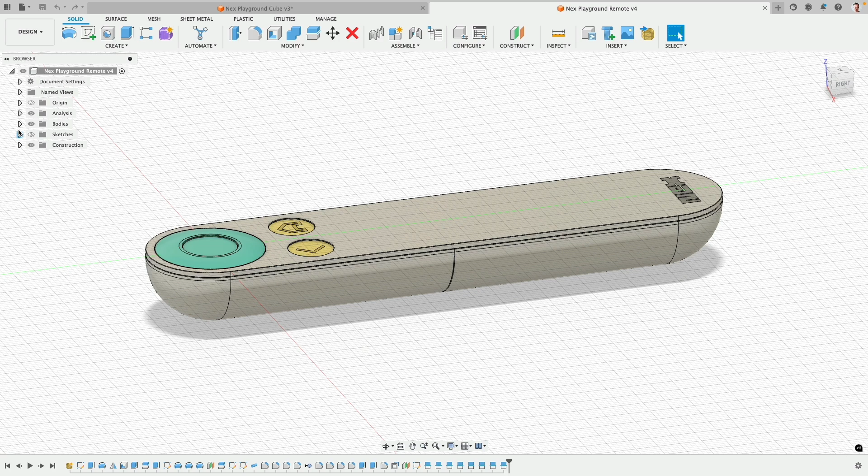I will run you through the whole process of bringing in a scan model as references, how to set up all the necessary sketches, and then building the individual designs. Also, as you can see, everything got materials, and I will show you how we can share the materials between different Fusion 360 files.

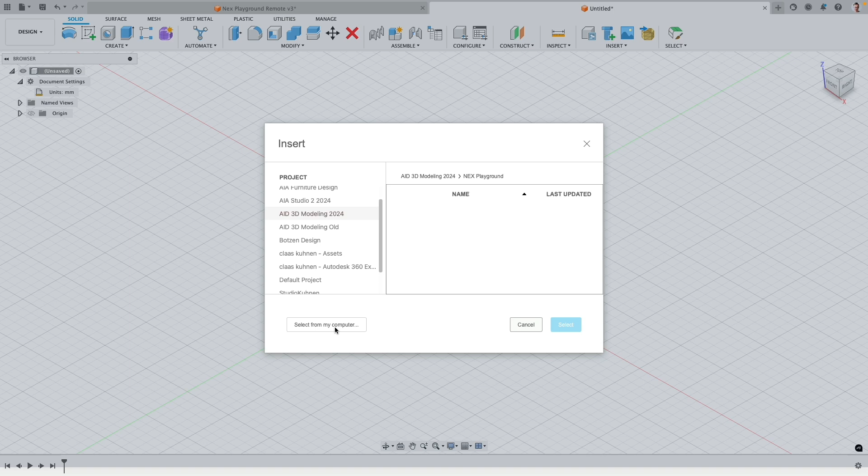Click on plus icon, right click, make sure the history is on. We want to have the unit system set to millimeters. Then we can go insert mesh, select from computer, navigate to where you have downloaded and unzipped the reference file, and here's the NEX Playground control.obj mesh.

Click open. This design was adjusted and then exported from Blender, which works in meters. So you want to work with meter as the unit system, otherwise it's too big or too small. Click OK. There we are.

Now I said no, we're going to create a more simplified version. It's a little bit faster, also less complex, more appropriate for this task what we're doing here, loading Fusion a little bit. Our first step to do is learning the building blocks.

So we can see there are some buttons, they're all circular, and then the main body looks like a rectangle with left and right rounded corners. Kind of like rounded corners, and two lines.

If we go to the side view, we see this is actually a little bit straight down, and then that maybe looks like an arc, but it's not really an arc. And if we go to the front view, we see this again goes down, and then this is nearly tapered, slightly curved, and then it curves more, so it looks more like an egg or something, not really a circle or ellipse.

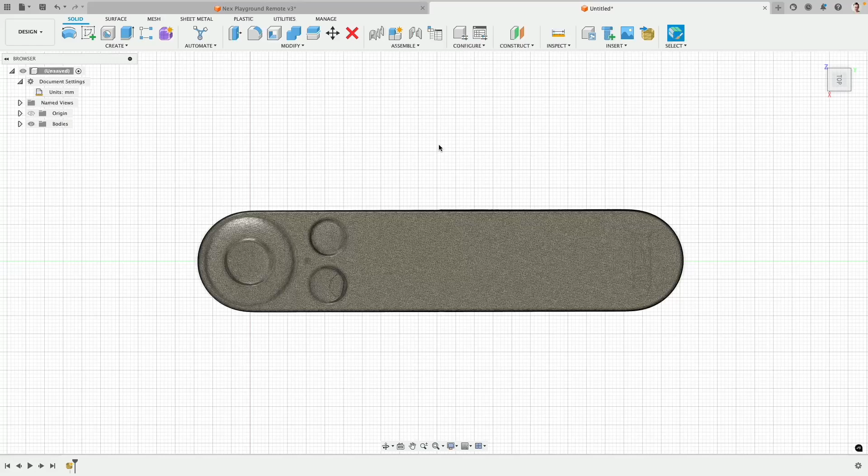We will create a sketch, and on the ground we can start with a circle from the center of the origin. I make somewhere another circle, then I will draw a line from circle to circle. I will also draw a line from circle center point to circle center point, then from the center point draw a line to the side, and then you can horizontally align these lines.

This one already has it there, so I don't need to add it. Go to tangent constraints and make sure the lines are tangent to the arcs. Very good. Equal constraint there. Press D. The first circle is 28 because they have an equal constraint. The other one is the same.

And then we can, while still having the dimension tool turned on after we press D, specify the width 130. Cool. Okay, so that's all what we need to start with.

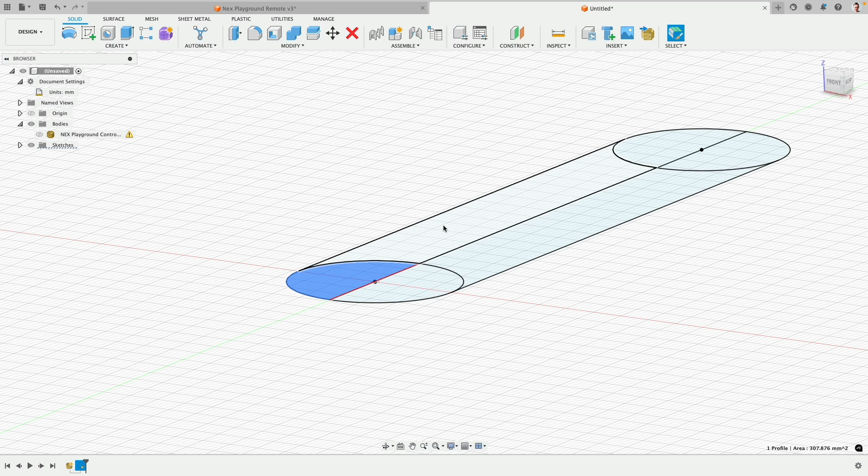I hide the scan, and then these three sketch faces I will select and extrude down -2 millimeters. That's all I need at the beginning.

And then I can select this lower profile, which, as you can see, is now kind of like what we nearly created with the sketch. Go to the revolve command, select this lower center line, and then I revolve this one down, for example, 180, and turn off create new body. Turn off join and select create new body, because I want that to be separate.

You can hide this. Here we have only half of the piece, so we can select the mirror command and mirror this over. This time here we want join to be turned on, flop. And then you should see two bodies. Pretty cool.

We can at this point also think about the shell, for example. Let's say 1.25 millimeters for the shell. So this lower part, which will house the batteries, for example, we shell out that way.

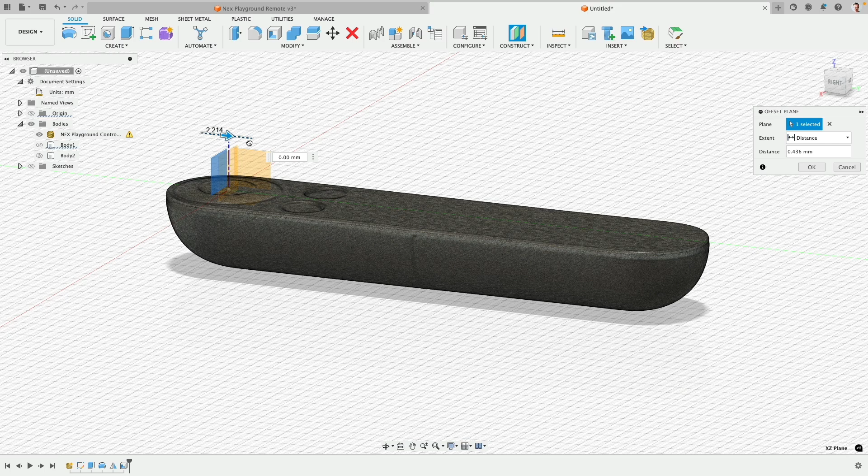Here's now the lid. And if I turn everything off, besides the scan, we can see there is actually a split line. So let's create a construction plane. Click on that Z and X plane, and we bring this over 51 millimeters.

That's going to be very useful because we can call in solid mode the split body command. The lower body we will split by that plane. There, we call then the move command. You see this got separated. It's a very simplistic way how to model this, but it works.

Okay, beautiful. Now, as you see, not too complicated. Und that was German, by the way.

So then what we can do is think about the interface elements. I hide all these bodies. Right click, make a new group. I find this very often is easier turning off the group than always turning off these bodies.

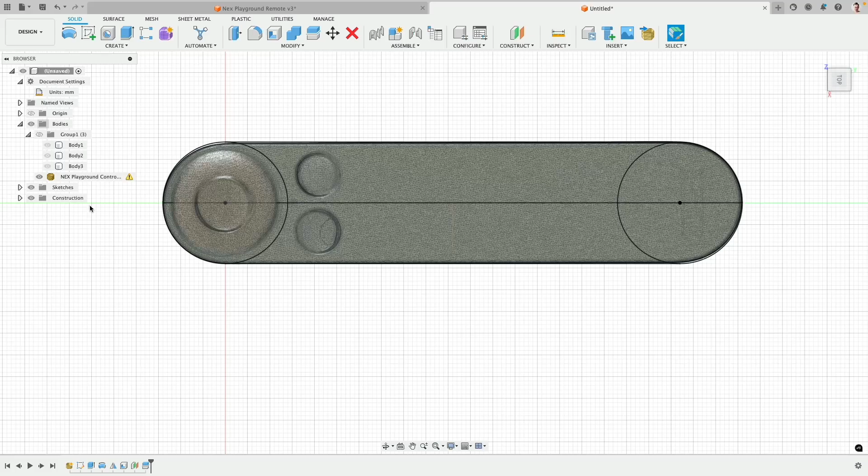There we are. And I will go to top view, right click, edit sketch, bring in one circle, another circle. These two circles are equally constrained. They have a symmetry to the center line. So when I press escape now, you see they move perfectly the same.

We give them a dimension of 10 millimeters. Escape, and yeah, that looks good. Can drag these around a little bit.

Let's say 6 millimeters. That's maybe a tick too close. Let's say 6.5. Yeah, cool. Okay.

Then one circle here. So we make that one 12, and one more circle 24 millimeters, and press enter. And these dimensions I can then also drag out.

The mesh can sometimes be a little bit in your way when you start trying to select elements, which is why I just turned this one off.

Okay, beautiful. We can click finish, and what we can do now is we select all these fragments, go to extrude, and then we just cut through. So we cut the holes in there, you see.

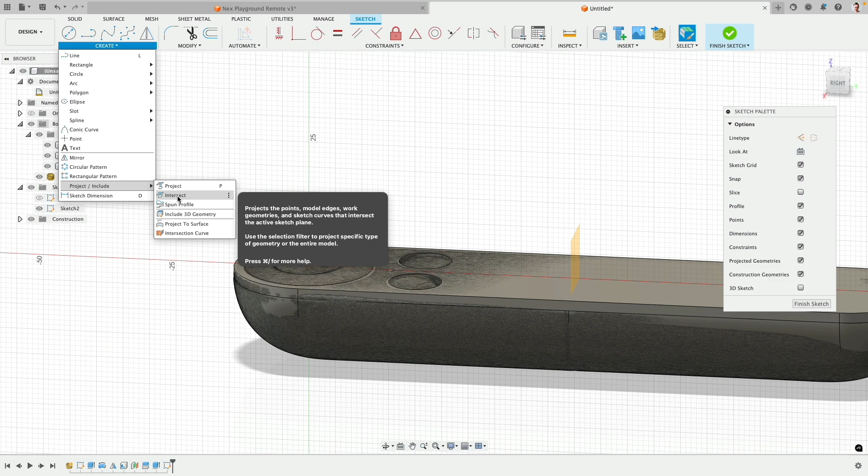Then create, go to project include, and I will select this intersect command. Click on that ring and click OK. And then I have left and right snapping points.

Perfect. So that's going to be very useful because what I can do now is I will draw myself here a line, connecting these 2 points. This also overlaps here with the y-axis.

There's more coincidence. I draw a line straight up. And if I show this one, the buttons is a little bit rotated.

I was playing one time and unfortunately the remote control flew out of my hand. Well, you should always hold it while playing, and smacked against the wall.

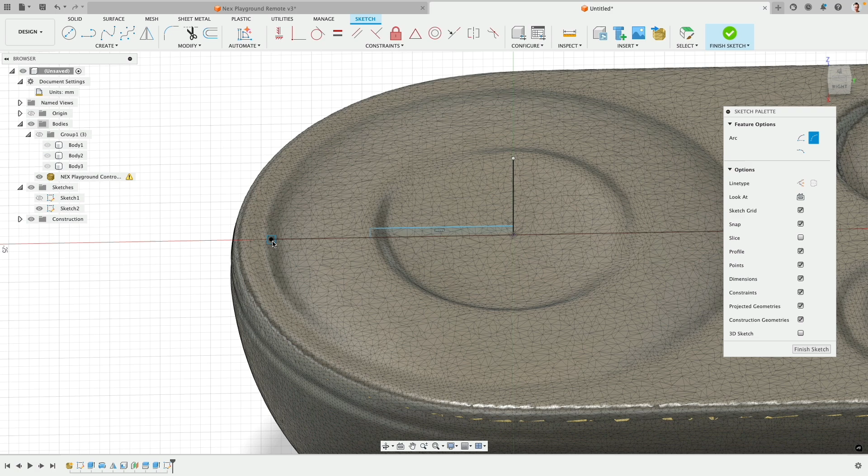Then we draw a line to the left side, say be horizontal. I can draw a line straight down, and then I will use the arc command. Start from the left, go to the right, and it's not so easy to see, but you see once the arc is tangent to the line to the right side, I get the tangent command.

This one. If you don't see it, you can also simply draw it this way and then say tangent, this one to there. Perfect. This line is horizontal. Very good.

And I will create another arc there to there. Okay. I will draw here a line. This line is perpendicular to this line.

If I delete that constraint, I can also make this horizontal. And then I say arc to this line, please be tangent. Very good. So it's a little bit difficult to see where everything is.

We can go to the side view, press escape, and then this, I think we'll go to somewhere here. This can go down a little bit. We have to be careful with what we are dragging here. So there, this definitely feels like it goes to there.

Does this line up? Oh, that's close. So we can select, oh, look, there's a line fragment. Sometimes that happens. So delete this one, bring this back on that line.

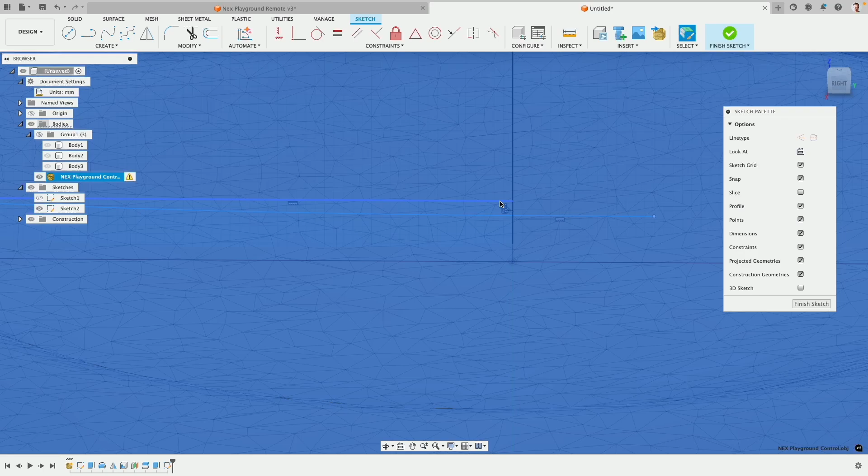And then I think, yep, that is horizontally constrained already. We select this line, press D, 7 millimeters. That is good. What is the height here? 0.7. Beautiful. The rest is predefined.

And because this is a button, it has to go down a little bit. So I'm drawing also here the rest of the missing sketch.

Then I can hide this and check out this. With Shift left mouse button, I select those two sketch profiles. Go to revolve. Now this line was selected. Or I can go to revolve, select these two profiles, axis, and select that. Now join. Beautiful.

So that is kind of like how I then created these two buttons. They press down and this presses down a little bit. They wiggle to a degree. And they perfectly also fit in, which is the nice thing. We have very sharp edges. That is totally fine, we will deal with that later.

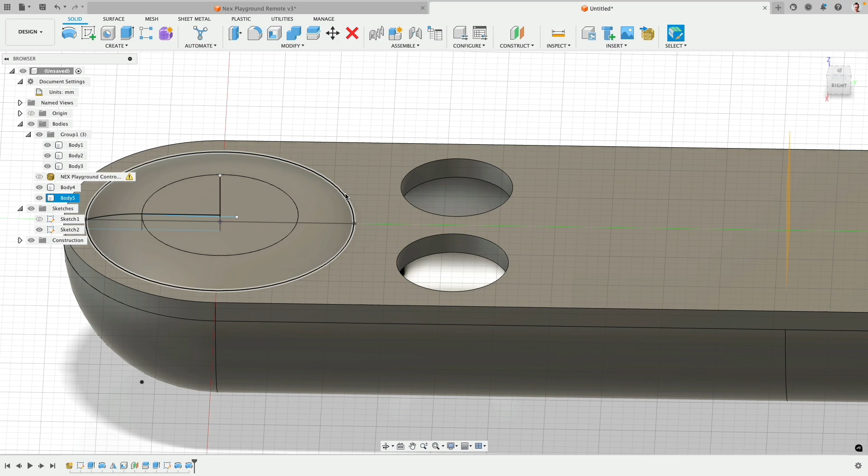So we have these two buttons. How can you make, for example, left and right button easy to differentiate? Well, one button could be concave and one button could be convex. What would be maybe an easy way to do this?

We need two sketches for the revolve command. But how do we position them? They're perfectly in there. Can we create an axis through 2 points? Yeah, so there to there. There's an axis. Beautiful.

And then we can create a plane at an angle, select that axis to create a construction plane that runs perpendicular through it. Then when I turn all this off and create a new sketch on this construction plane, you guessed it, I will do exactly the same thing again.

Bring this one in, bring this one in. This I can hide, and I will draw myself here one line, escape, and then one line there, and escape.

Midpoint down, let's say 2 millimeters, and L is the line command. There's the midpoint there, 2 millimeters down. They have to be black, otherwise these lines could be rotated, which means...

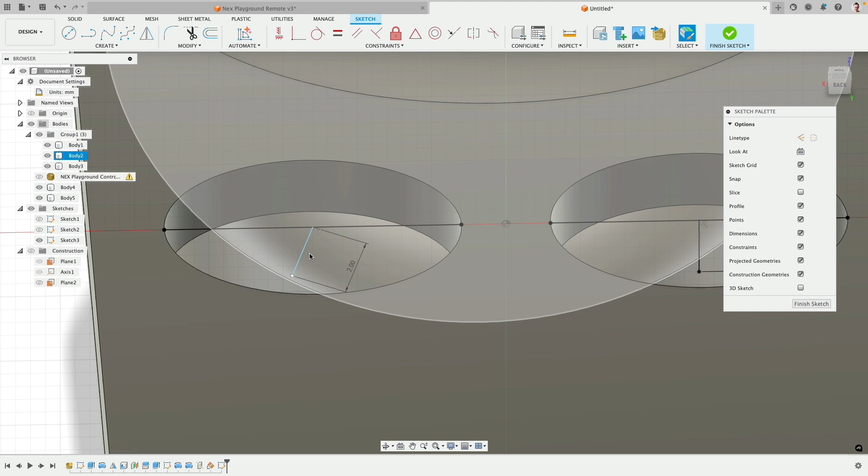Left mouse button click. I can't actually select... there, that's the perpendicular constraint. If I delete it, you see how this can rotate. Then just make this horizontally constrained. At this point, we can drag these two into that group, hide that group.

So it's much easier now to work with. The left we will make concave, and the right we make convex. Easy peasy. So I will continue the sketches here, just blocking out my rectangles. We said this one we make convex, and the other one we will make concave.

Actually, I dragged this one over. Oh look, this can be rotated. Now we horizontally constrained it. These are just only helper lines.

So there is the arc. So if it will be concave, the arc has to start on the outside. And here the arc, the bottom has to go down and ends at the center. And there it is. Tangent to this line. Perfect, finish sketch.

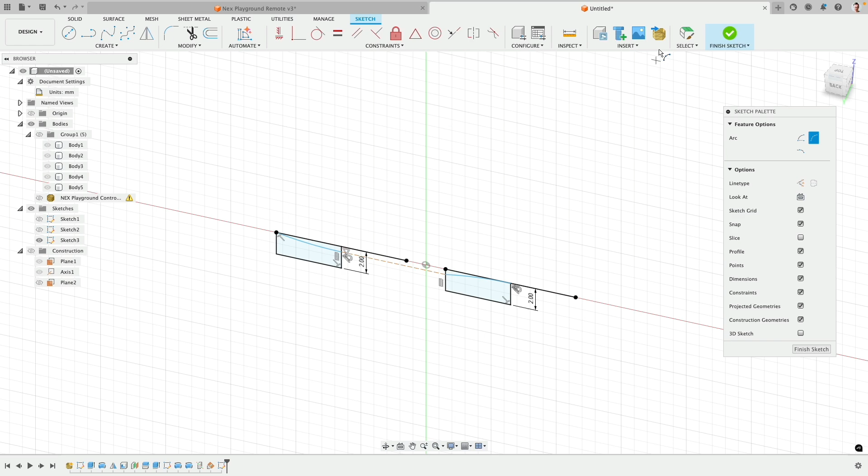Then we go to revolve and say you rotate around this one, right click, repeat, around this axis. Oh, look at that. Concave, convex. Easy peasy. Beautiful, very nice.

We do have actually at this point a lot of our details done. Filleting, etc. might come at one point. But before we do this, there's one last thing to do. You see here we have kind of like a cut.

I messed up actually the scan. That should be on the right side. All good. How can we create this groove that runs over that surface?

It's pretty easy. I want to create a sketch, seen from here. Then I will draw a line up and a line down. I will make both lines equal, press D, and then say this is maybe 9 millimeters.

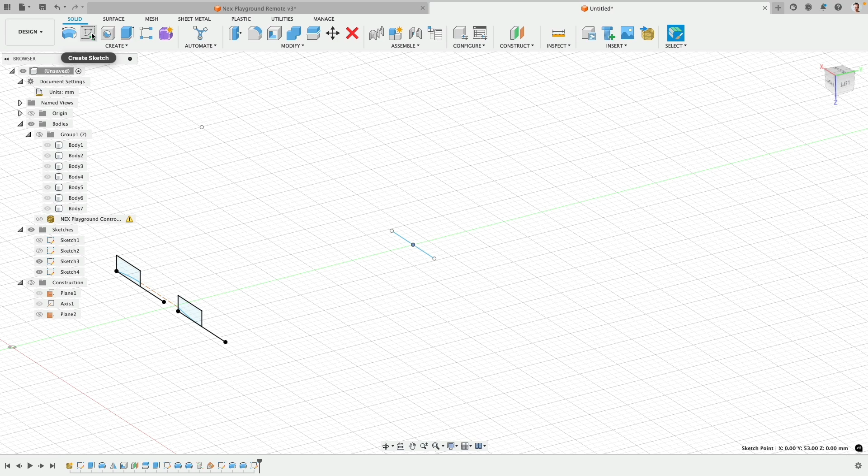Do I have actually a selection turned on, or select through? Okay good, and I also have the paint selection here, so brush, not window selection. Anyway, that's actually all I needed for the sketch. And now what I would like to do is I would like that sketch to project onto there.

To do that, I need to create actually a new sketch. So create a sketch, it doesn't really matter what we click onto. Actually hold on, because you didn't really see this. Right click, delete, make a new sketch. I will just select this plane, and then I will call the project to surface.

So on that surface I would like this and this to be projected along vector. Select the direction, that is the Z direction, and then you should see the red line.

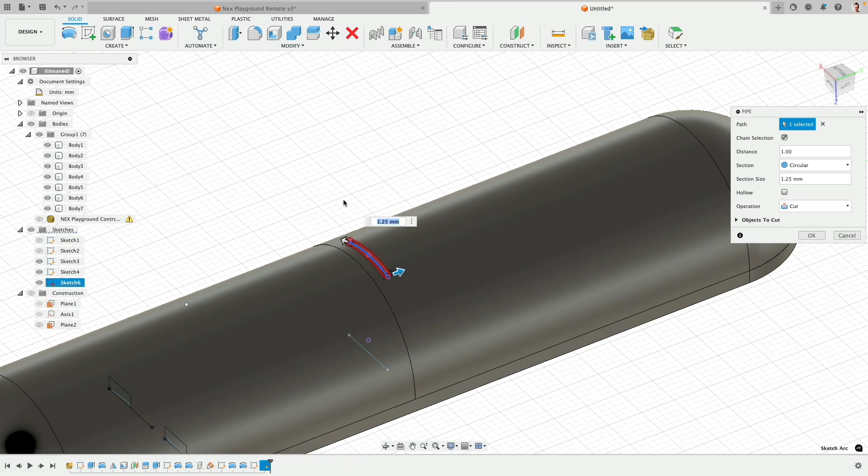Beautiful. So what we can do now is finish sketch, go to pipe, select with shift and left mouse button these two segments, section size, let's go with 1 millimeter so we don't make this too thin. Click OK. Perfect. We have to be careful that we're not cutting through.

If I go to a side view and say section analysis and click actually on this plane, click flip, and there we can see how we are cutting into the space. Well, the section actually is fine. All good, and then we can turn this off.

Sketches we can also hide. And this is now a point where we can start detailing everything.

I will start here, play with the fillets. So this has to be actually half of this edge. Is that 0.5? 0.5 millimeters. What's the radius? Oh, radius is 0.5. Right click on the pipe feature. Yeah, 1 millimeter is a diameter, so the radius is half a millimeter. So this is correct. And then we do another fillet, 0.25 for example, to fan this out a little bit, or 0.5.

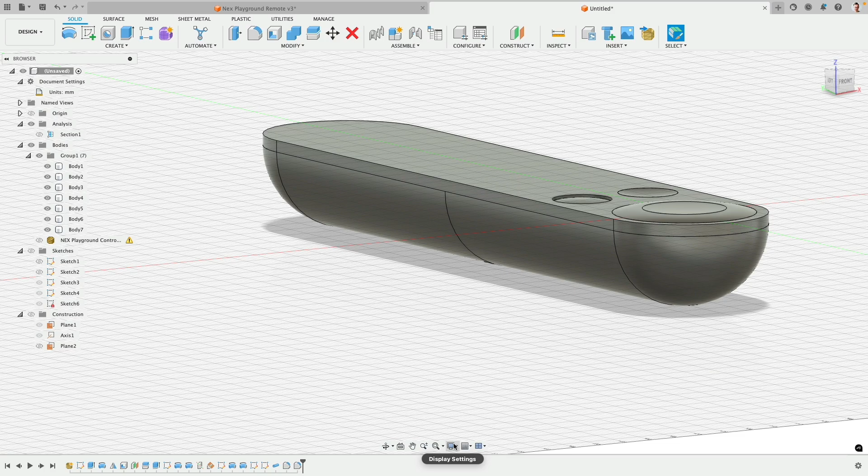Yeah, this is very easy to feel. We see all these edges. And if I go to shaded visual style, they are totally gone. To highlight them, what we can do is we're going to break these edges a little bit.

I will hide this button, this button, this button, and this button, and then I will go to fillet, and then I will say so you, you, and you, and this is the complete one for the top part. So I think there should be around, yeah, 17 edges, and then a very small amount, maybe 0.1, not too much.

Sure, you have done everything correctly. Yeah, all these edges should be rounded. No, actually, we needed to have 18 edges. Okay.

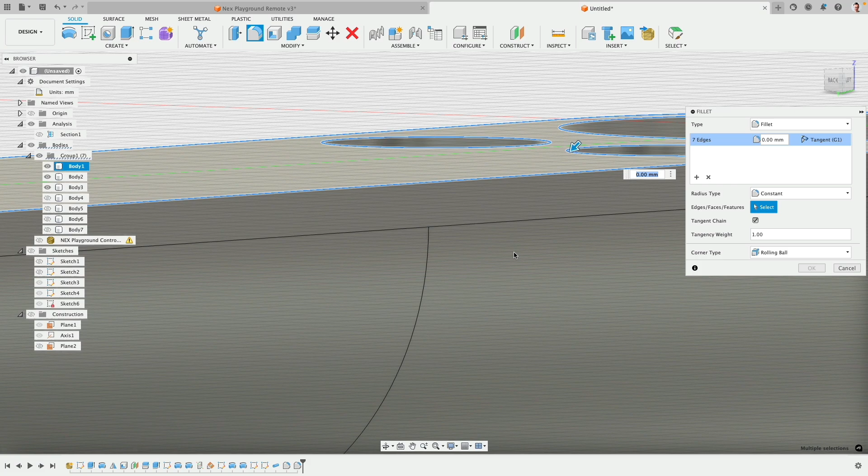There, but only on the outside. 0.1. Here was one ignored. So on a Mac, I'm holding the command key and I brush over here one more time. Click there. There's like, it's skipping actually some of those.

Okay, let's do this. So I simply said okay. This one we can hide. Then I go back and say add feature. Oh, actually it shows that again. This is sometimes a little bit annoying. Body faces.

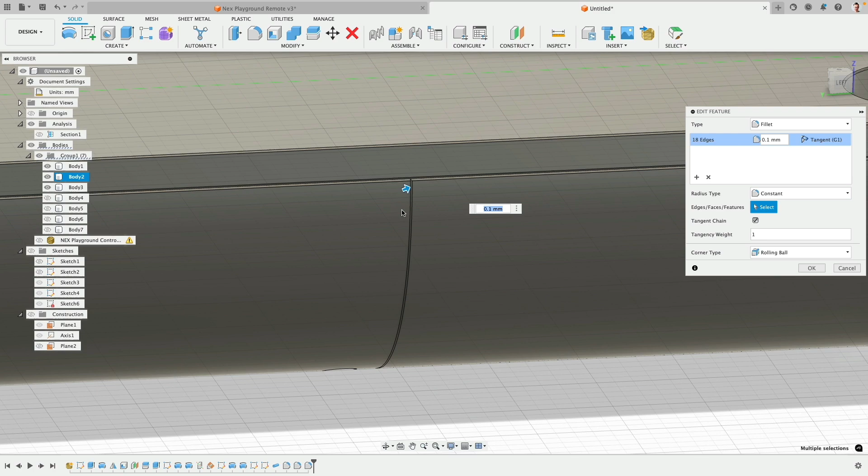So if, for example, like in your case, this doesn't work out, what else can we do? Actually, it's not really complicated. For example, I will simply do this. I say this one, this one, this one, this one, and this one. This is 0.1. Thank you. Then I hit the plus.

Hide this one, show that. Then I should be able to select those. 0.1. Okay. Yep, that is fine. Hide this one, show that one. Go plus, and then I click on these edges and say 0.1. So I will have one fillet command only, but I will have 3 different sets of edges. Click OK, very good. And there.

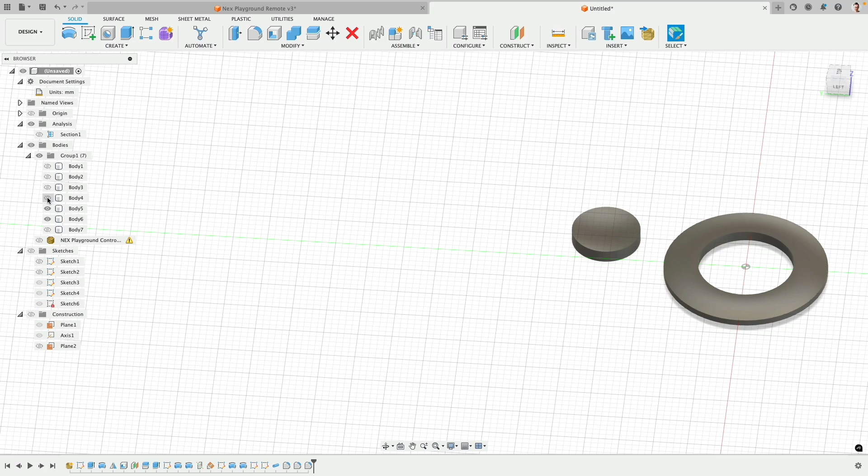Cool. Okay. Then we can turn that stuff off. We can show, for example, the buttons. Go to fillet, select this one and this one, 0.2 or 0.1, 0.2 maybe. And here, essentially, we do exactly the same thing. Right click.

I hold the command key, click this one, click this one, click this one. Can I get all 4? Yeah, I was able to get all at the same time. Beautiful. So all these edges I was able to click on this time without any big issue. Click OK. There we are. So all these are actually nicely filleted. There.

And this is maybe a moment then when we can think about the materials. So we can press A. Then we go to our library. Based on what type of finish you have, is it a matte finish or a glossy finish? Is it plastic or something? Nope, just simply pick what you need. We have here plastic as a material if you want to work with it, but I find this render is sometimes a little bit slower. And here in Paint, there's, for example, the glossy material.

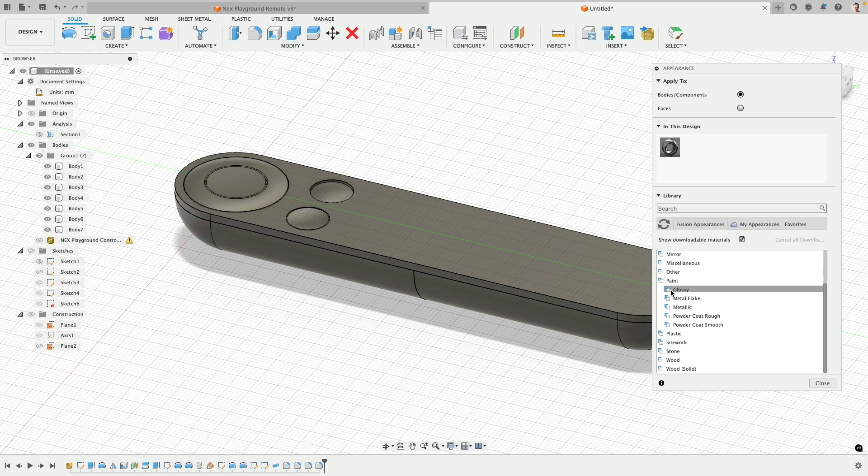So this is a little bit of a whitish material. So I can just drag it in, drag this one onto all these parts which are colorized, double click, and then I can find, for example, a nice whitish color. I know this one is 220 for both.

There, click done. Oh, double click, also give this a logical name. Test material. So why test material?

Because now you could right click and say copy to my appearances. You notice when you go to my appearances, there are all the other materials. There's, for example, my NEX Playground white, which I will drag in and drag over this one. So this is consumed. These buttons are yellowish. We'll drag this one in. So button, and these have that green color. Let me right click so you can see the green is 97, 206,

197, and this one is 245, 231, 138. So if you then make a new design and go to my appearances, you will have then the same materials. This way you don't have to remix them constantly.

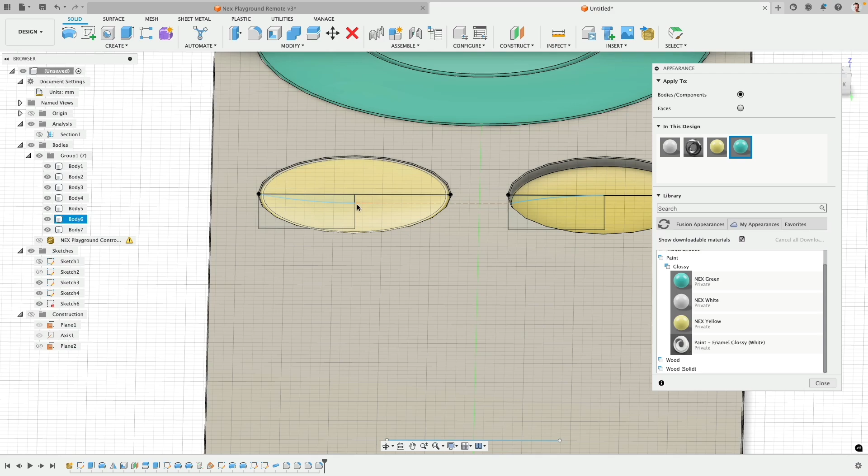Beautiful. Okay. So this is all actually pretty good. I want to do one little double check here.

Oh, I have to close this one. There, show this one. And this sketch, right click, edit.

Yeah, so this is indeed tangent. Is this horizontal? Yeah, it was horizontal. The reason why I wanted to verify this, I see a little kink there. You can see it right there. There's looks like a little pointy thing. This is often a giveaway that the arcs are not tangent to the other side, but this is okay. This is correct.

Now, to finish this, we have to create the button textures, so the symbols, and then we bring in the logo. The logo is also in the file. I googled the NEX logo, and then I was looking for an SVG file. This is something that's very common if you also work with other brands. They have their logos. You don't want to create the logos.

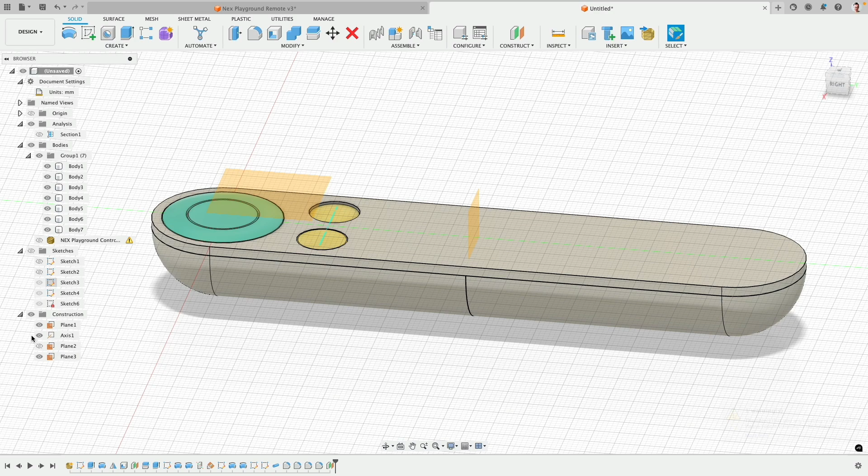So I will create a new plane. I will bring this plane a little bit higher so it's easier to see where I am. On this plane, I will create a sketch. Then, no, since I have the NEX logo already, I go Insert SVG, insert from my computer, and oh, there it is. There is the logo SVG. Open. It is pretty big the way how this comes in.

It needs also to be rotated, and then it can be scaled. Then I can move this into position, use the grid kind of like to do a little bit of bean counting to center it roughly. So one, yeah, and there we see this is pretty centered. Click OK. Very good.

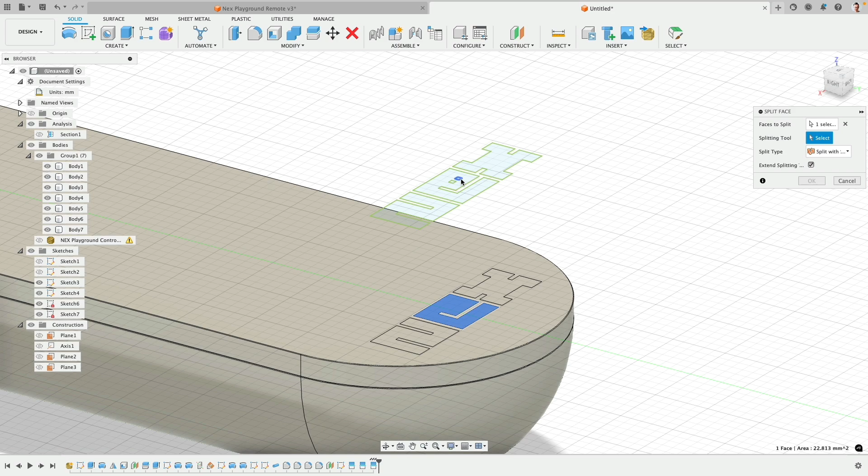So what can we do with this? Well, with this sketch, we can then go ahead and slice the surface. So split face. This face I would like to split with this. Right click, repeat this face, split with that one, right click, repeat this one, split with this one, right click, oops, this time no, this one will be split by that one, right click, and then the leftover by that one. Cool. Okay, because now if we go to A, we have here this white.

I will make a duplicate and then double click. I will lower the color and let's say white print because that's printed on it, and go to face, and then I drag this onto there. See, that's actually how easy that is.

How do we do the circle stuff? That's also pretty easy. I will actually make a new sketch. Maybe that's simply easier. So a new sketch onto that same construction plane. Then I press P to project these outer edges. That's very important. Just the outer edges.

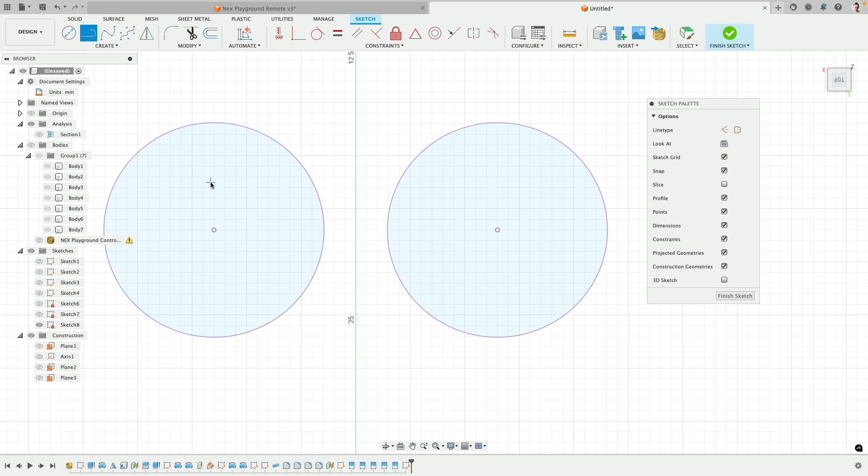And say okay, there I have now the circles. I can hide this, go to the top. Where are they? There they are. Let's do the arrow, cling, cling, cling, cling, cling. It can be pretty chaotic.

We need one horizontal line, that's important. That's a construction line. Then we have to do a lot of equal. There, horizontal for that one. Very good.

And then parallel. So U to U. Ouch. That was too much. So it's undo, press D, aligned, maybe 0.75 of a millimeter. Yeah. So all good, all good.

We will fix this. Ooh, slightly a little bit funny. Horizontal constraints. So maybe this point to this, we can horizontally constrain them, so they're always at the same. We also need to add some perpendicular constraints to these corners. There. You see that actually will then slowly start to tighten everything up. Still kind of funny how sometimes the sketch now jitters.

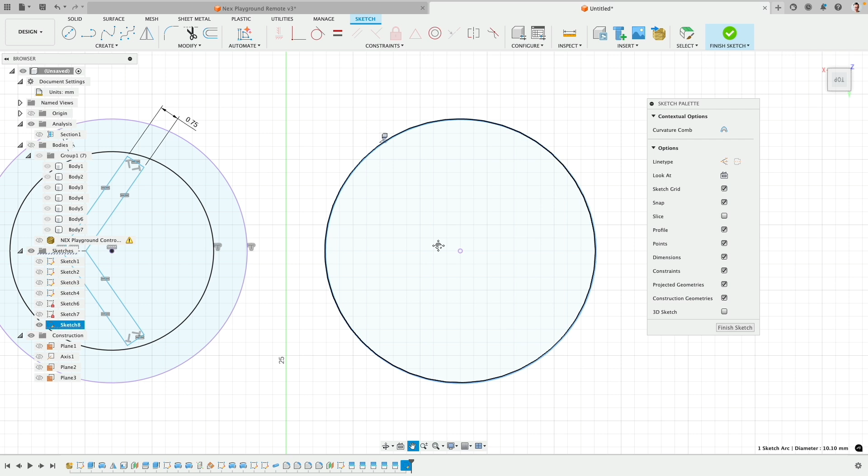So what you can do is you select one point, lock it, press escape, and then it's much easier to move the rest around. I will go to offset and bring this one down minus 1.25 millimeters, because this is kind of like a parameter I would like to have, and I will do the same, minus 1.25.

Minus 1.25. I said minus. There. Okay, I could even connect this one to it. Again, these are just helper lines. Cool. Okay. Beautiful, yeah, that's kind of nice. Then here, maybe someone there, down, down, over, and up, and over, and down, and over onto the ring, and from there up and back.

And from here, one down to the midpoint, escape. Then this line will be horizontal and construction. And then horizontal. Sorry, oh, I have all these perpendicular constraints, so this is all good. That's the reason why I got this error message. I will make these two equal. I will make these two equal. These two, I don't need to make them equal. I can just make these points.

Horizontal escape, and then I can start, you see, dragging this quite nicely. And I would like to create an offset also by 0.75. So you go down, actually, yeah, minus 0.75. Okay, because I had this one turned on, these were created as construction lines, not what I want. And nope. Very good.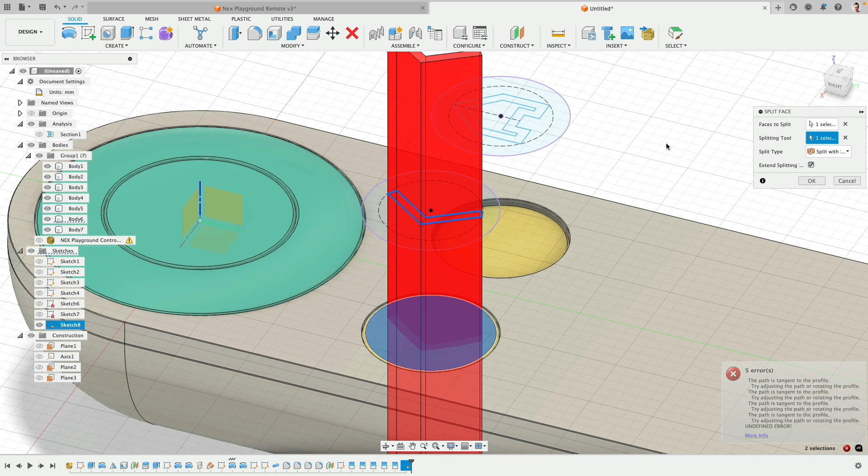Finish. Cool. Show the bodies. And then you guessed it, we go back to split face. This one split by that one. Whoa, what's going on here? By that one. Right click, repeat. That split by the outer one. Right click, repeat. Now the inner one by that one. Cool. Press A.

Duplicate, double click. Here I say print to, and maybe make this a little bit darker, more saturated. Then we can select these two faces, apply to faces. Sweet. Close it. And there we are. There is the remote control.

I do have a project folder. So for example, inside my project, I made a new folder, called it NEX Playground. And then when I go and say, for example, save this one, then you can just navigate to wherever you have that project and the folder. So then all the files can be copied right into that folder.

And we are done. Okay, so with the remote control done, let's do the last object, basically the gaming cube. Also here, we simply start with creating a new design. Right click, make sure history is being captured. Also here, we want to set everything to millimeters. Then we go to insert mesh, navigate to where you have downloaded everything. There's the cube, click open and meter and okay, perfect, cool.

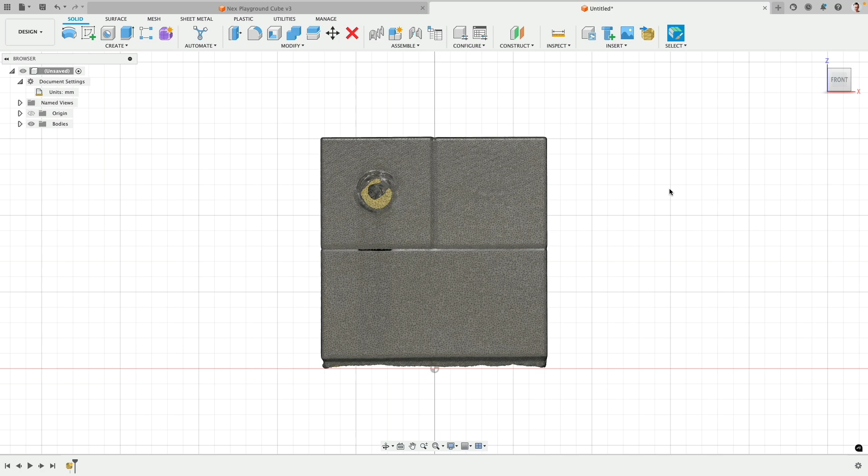So pretty much the same thing like what I did with the remote control, we're going to do first, trying to analyze what we have. This is actually a cube, which is horizontally sliced, and then the top volume is sliced twice to create these smaller cubes. There are kind of like grooves there. We also have a camera. We have some power and HDMI. And then here we have a pattern with these holes for cooling. Okay, now, so not really complicated. Oh yeah, and there's kind of like an LED thing. So there are always many ways how you can start.

I find in this case, what I'm using is just one way. So we'll start with a sketch from the front. I will draw here a small line up. I have no idea where this later will go to. I will hide the scan, go to create, then I will go to rectangle, center rectangle, and on the z-axis draw myself this rectangle. I will go to equal, constrain these two edges. Very good.

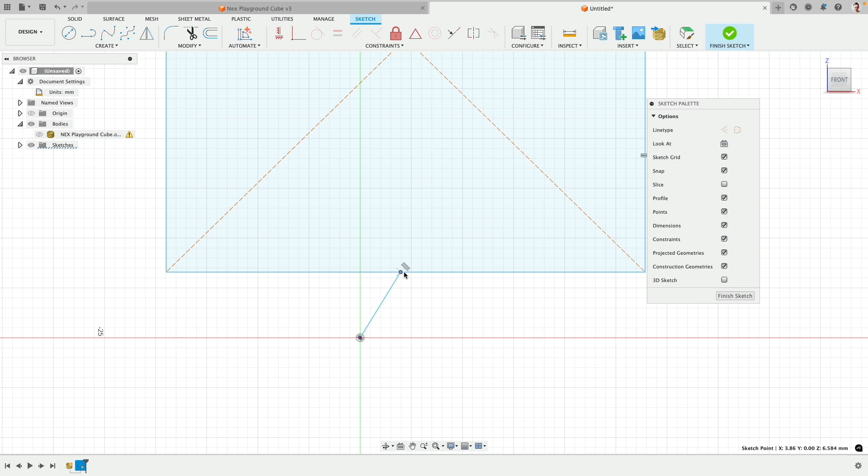I will press escape. Here, this vertical constraint I delete, and then drag this point to where, oh, there it is, the midpoint constraint. Because now, as you can see, with that vertically constraint again, I can left and right position it. That thing should be, let's say, 3 millimeters. Press D to add the dimension. And this should be, yeah, how big? Definitely too small.

72. One second, where did it go? There, double click. That should be 72 millimeters. That matches it pretty good. Cool, okay, so 72 is the width and height. That means if I exit the sketch, I go to extrude and extrude this one out to being symmetrical to a distance of 72. Click OK.

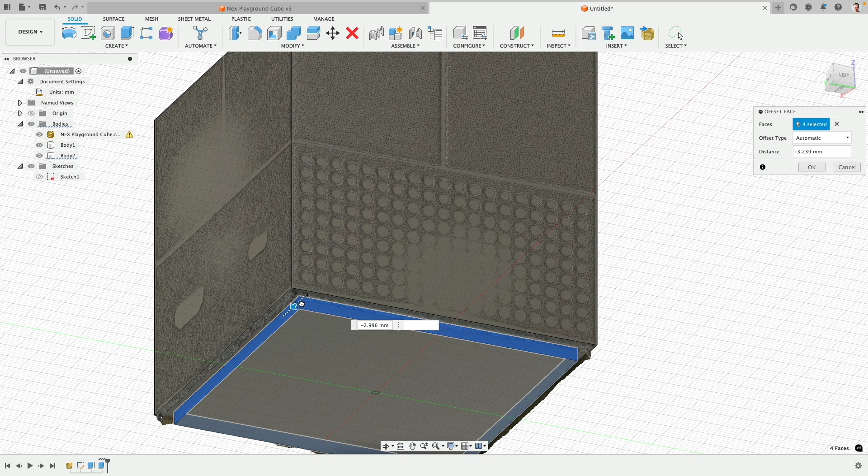Good, this sketch actually we don't need anymore for the moment. So there's now our cube. We can create the rubber base or silicon base this sits on. Very simple solid modeling, we click on extrude. This goes down 3 millimeters, but as a new body. And then we select these outer faces, go to push and pull those in. Looks like -3 millimeters. Oh, it's actually maybe even less. Right click, edit, and change this to 1. Cool.

So how do we do this slicing now? Actually it's not like individual parts, they're just grooves being cut around. So I need a path for how to cut it. I can slice the surfaces with the split face command, one here, one there, one there. Again, there are multiple ways how you can do that.

In this sketch, I could draw a line here and there, and essentially I'd have a vertical and a horizontal slice. But I don't have it from here, then I would need another sketch, which is why I don't do it that way. I will do it this way.

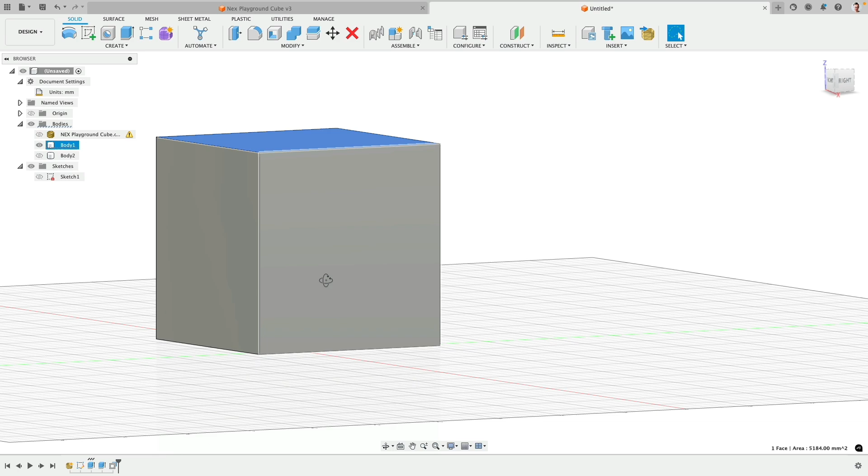I will select the top and the bottom, and then say make me a plane at the midpoint. Because now what I can do is, there's this plane, I say split face, so you, and you, along this one.

Because this object was also designed perfectly centered, I can also now use the Z and X, and the Z and Y plane. I will not do this on purpose though. I will go one step backwards. Before I did that splitting, I will simply go and do it this way, because I position these construction planes based on where my geometry also is.

And then now I will continue with the cutting. You see here, I moved the time marker. Then, not split body, split face. So zack, zack, zack, zack, zack, split by this one, right click, repeat. Zack, zack, zack, zack, zack, zack, zack, zack, by this one.

Thank you, and the construction planes can hide. Oh no, one is missing that face. Yeah, this is beautiful. Cool. There's the front view. Very good.

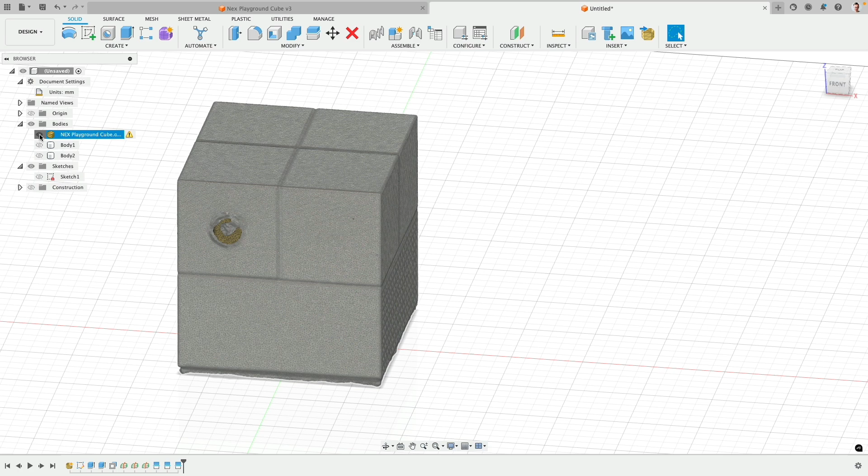So that's the reason why we will go ahead and call the pipe command. Because then, look at this. Oh, nope, nope, nope, we are selecting, this is way too big. What's going on here? Cancel. One more time. And then you have to hold on the Mac the command key, and I think on Windows it's the control key, so we add more elements to the edge selection.

Distance is fine. Section size, that is pretty big, a millimeter, 0.5, so half a millimeter, it seems to me. Or maybe it is a millimeter. Yeah, let's go with a millimeter. Cool, then right click, repeat. Now I will go along this line.

By the way, this is not circular, this is square. Right click on this feature and we say square. So you see this cuts actually these grooves beautifully for us as a pipe command.

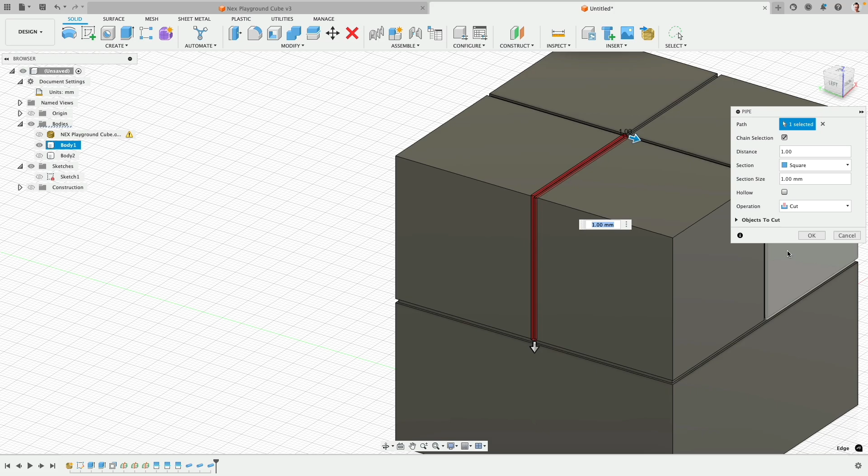Here we have to do this twice, one time that way, and then right click repeat pipe along there. Very good. Then we can go to the front, and now we have these smaller rectangles. There now we can create everything for the scan, for the camera and the LED thing.

I will do the LED one first. Here's my slot tool, click, click. So it's like left and right, center point, and then the diameter. Press escape, hide this, show that, bring this one down there. We can press D and then this line to here, let's say 3 millimeters. Right click and say pick circle tangent there to there, and we make this 10.

Cool, how do we center this actually? Look, here's a line, there is the midpoint. There's the midpoint, escape. That's a construction line and a horizontal vertical. Now this is horizontally centered, not necessarily vertically yet. So there's the midpoint. Click, and construction there. Easy peasy. Cool.

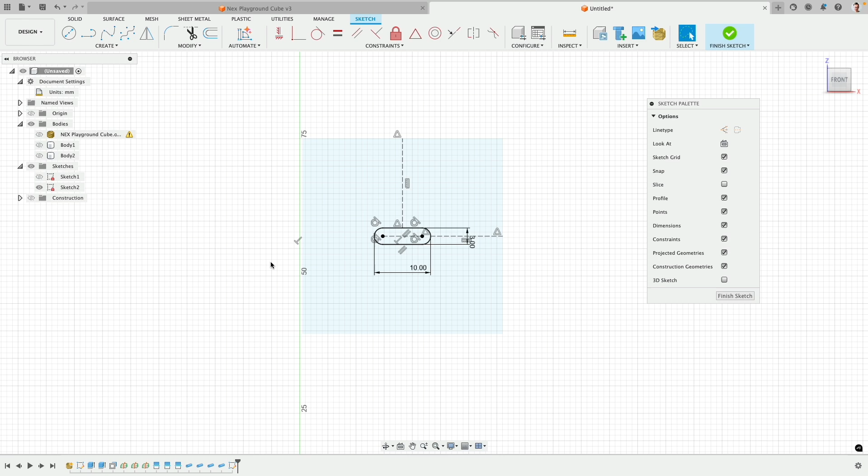With that there, I can go ahead and then there's this piece here. Now this is actually going to be a little bit a different case. Here we can cut in, but this has to be revolved. But ideally I want to find also there the center point. So I will draw myself a circle here first, okay?

Now you see this. And then I will draw, well actually I don't need a line, but if I draw this line up, no, I don't find anything in this case because I didn't really create the sketch on that face. So I will go to project this and this into my sketch. There, you see, you go up and you go over, and you guessed it.

There, interestingly, yeah, so perfect, cool. Finish. Now here I have something which we can use to slice something into pieces. So we'll go to this, very good.

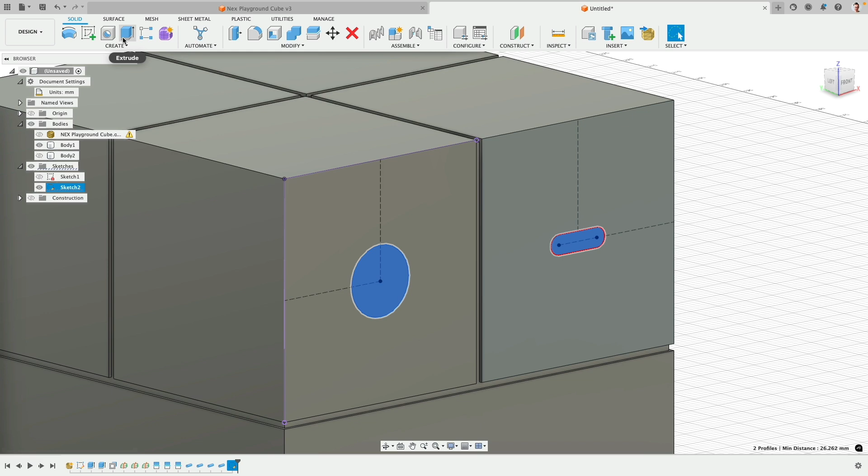Select those, go to extrude, and then cut this in. Let's say -3, how much doesn't really matter, it's anyway just more a prototype. And then here I would like this, because in terms of reality, we will bring this back 3 millimeters, but as a new body, because this is the LED piece actually. To assign a material, otherwise we could have just only sliced that surface. But how do we proceed here?

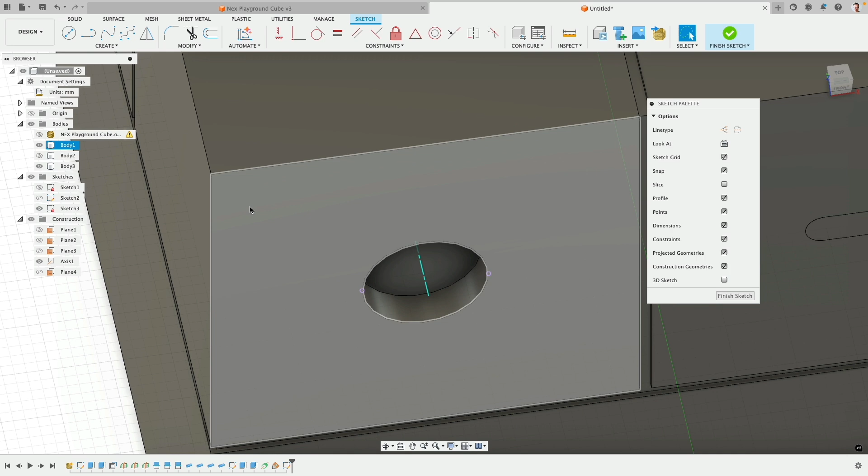I need to find a center line of something. So easy peasy, we simply create ourselves an axis through the cylinder. There it is. Quite many construction planes. Then another construction plane along here. Sketch on that one. Then I will intersect this edge with the sketch. Go to a top view.

And then I start, I think we went in 3, and there I actually don't know how far. So maybe click there first. I know a little bit this goes over and then this goes to there.

Here I will try to, can I project this one in? Yes, I can. So this axis I brought in, you see now I can glue it to the axis. So, you to you, coincident. Thank you, there we are, perfect.

I go to top view. Now it's a little bit easier to see. The scan is a little bit, how can I say that, moved, it's not perfectly positioned. So here we'll make a horizontal line. This, for example, is just a construction helper. And then go to arc there.

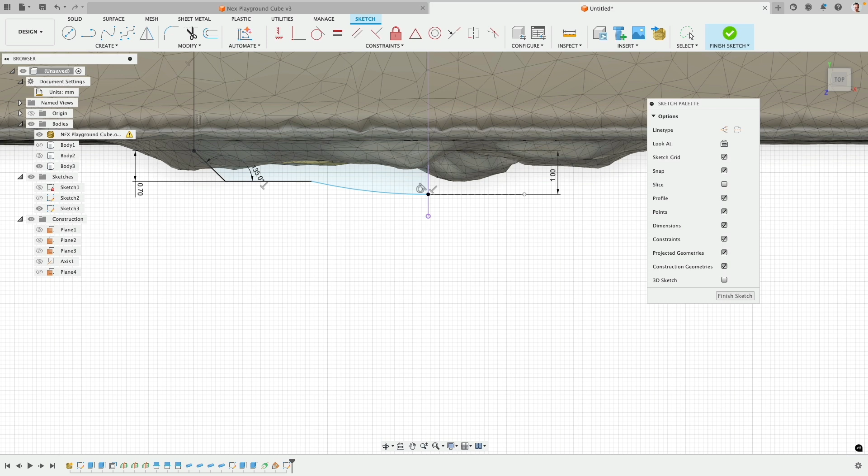That should be it. Escape, and then I say this point to here, 0.7, let's say 0.7, very nice. What's that angle here? 135, so that's 90 plus 45. And here to there, that is 1, yeah let's say 1. That is okay. You to you, that should be 4. It's maybe 3.5. Very good. Cool, okay.

This is a very simplified idea of the camera. It has the housing and the lens. Then we call the revolve command. Now you see this, for example, plugs in. Why do I model these elements having a socket to go in there? The main reason is if you 3D print different variations, you can take the buttons or cameras out and put the new one in.

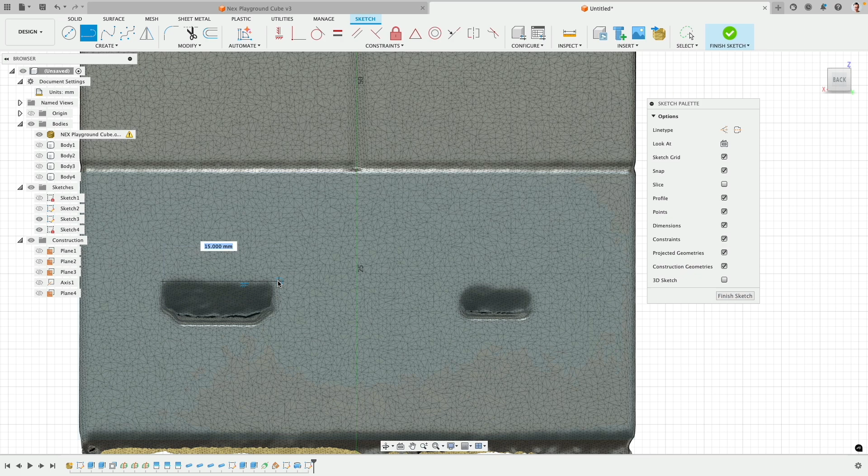Good, so that was pretty easy. Let's take a look at the back. So here on that face, now I will create a sketch. I will hide all these buttons. There's my USB-C and my HDMI port. Click, click, click, over there, there, there, there, there, there. There are some specific dimensions for how they have to be designed.

Could, for example, Google them. We will here just eyeball this a little bit because it's otherwise a little bit too much tedious work. How much is that? Ooh, that is actually too big, so we should make this more realistic. So 3 is fine, right click, U to U. Let's go with 9, yeah, okay.

There to here, that's also a tick too big. I think the scan was a little bit too soft there. So maybe 4, okay. And then we can change everything here a little bit. So this line to this line, I will make equal. U to U will be equal. U to U will be equal. Very good, so now everything is left and right is actually symmetrical. That is quite nice.

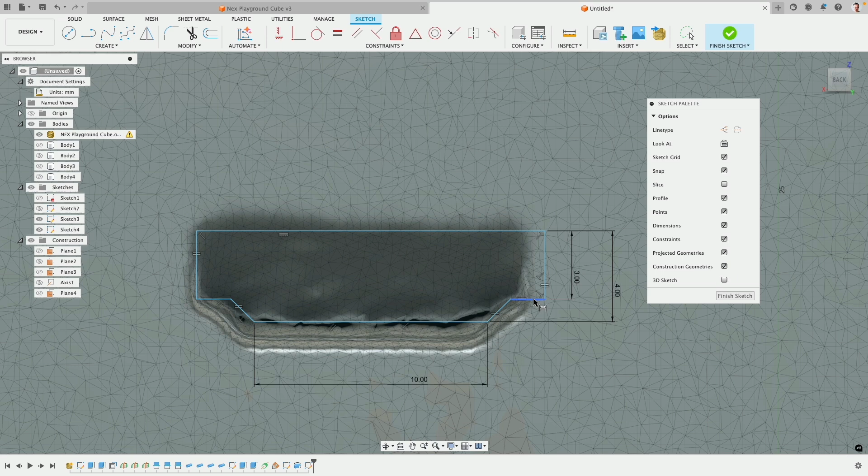How much do we have here? Let's say 9. No, let's go 10. Yeah, this has to be a tick shorter. And these we make 3. Yeah, these have to be really tiny, actually. 11, maybe 12, yeah 11.5. That gets a tick closer. Cool, okay, how can I center those two? Very easy, there's the midpoint, there's the midpoint, there's the midpoint, there's the center point.

You might notice the repetition between modeling strategies. That's a nice thing, actually. Once you realize how it works, it's pretty easy.

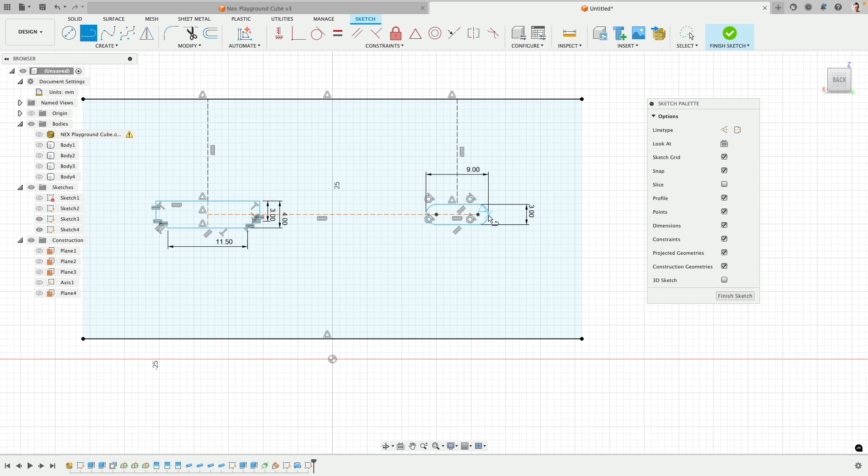Cool, okay, now to position them also in their respective rectangles, you see here I'm drawing from these blue corner areas. Careful of these artifacts. I will draw myself here some lines, or I could also have projected these edges into the sketch. There's the midpoint, there's the midpoint, there's the midpoint, there's the midpoint, and then zack, zack, zack, zack, horizontal, zack, zack, construction. And then I only need to use either the midpoint, or I go down here and say these two are equal. Flop. That should be close, yeah, close enough. Clunk, clunk, clunk, clunk. Then exit sketch, and we make some deep cuts.

Kind of like that, feels like really we can put something in there. Now later, here's a little tip, by the way: if we make these inside materials black, then it always looks like deeper holes. So look at that, we are nearly done. We're getting there. We have to do the cooling ducts.

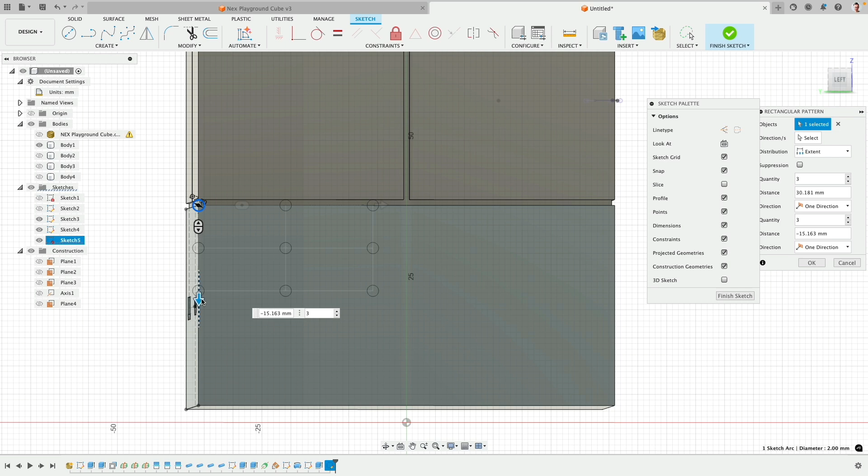Then we will go to a rectangular pattern, select this circle, and drag it out. So this will be 13, and these will be 21. You see how we can drag this pattern out, but I want that to be perfect, because this edge is actually 72 millimeters, so I drag this pattern out as long as this edge is.

And this one here is 35, 75, I think. Or can I click? Nope, 35, 50. So double click on this feature to get back, and then we correct this.

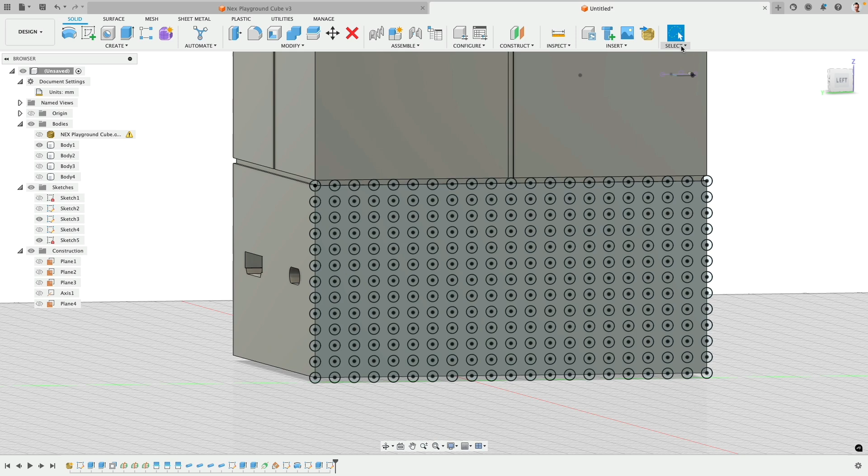Beautiful, cool. When we take a look at everything we have, to make things nice and easy, we can go and say select. So what do we want to select? Not everything, but sketch surface. Nope, that's not it. Sketch profiles, and go to this view, window select, and drag over all this.

There, look at that. And then we do an extrude and go nicely inwards. Let's say -6 again, make this nice and deep. And then we have to do the same on the opposite, which is very quick because this is a symmetrical object. We simply mirror over the feature, mirror this across this center plane, click OK. There, cool.

Last thing to tidy up is selecting all the edges we'd like to be kind of round. I was actually a little surprised to see how sharp some of these edges are, considering it's a toy for kids. Okay, 0.5. Yeah, that's fine, 0.5 millimeters.

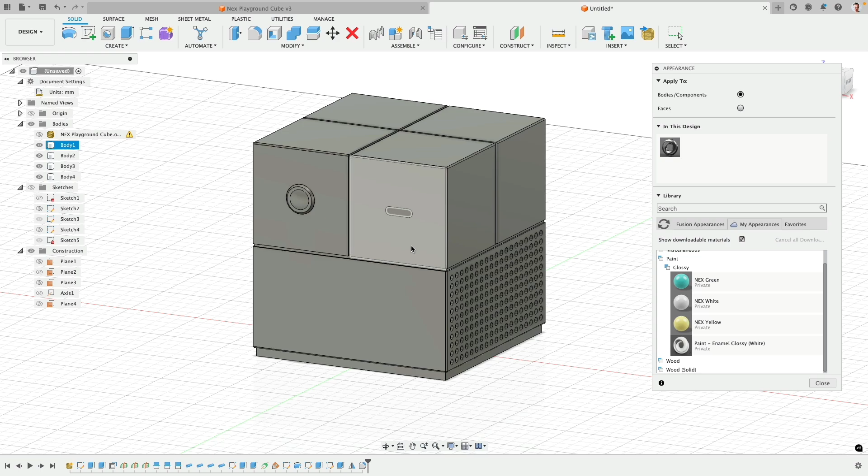Cool, now we can go and assign the materials or appearance. We can press A. Look at that, there we have everything. So I'll go to bodies and components. I'll drag the white onto it first. This goes to there. There's also a black part. This is an LED. How do I do the rest?

So now the question is, in the end, honestly, what's easier or quicker to do? Maybe I go to this view and hide everything I don't want to work with. Okay, now you see that. Oh, hold on, there I will run into a little bit of an interesting issue.

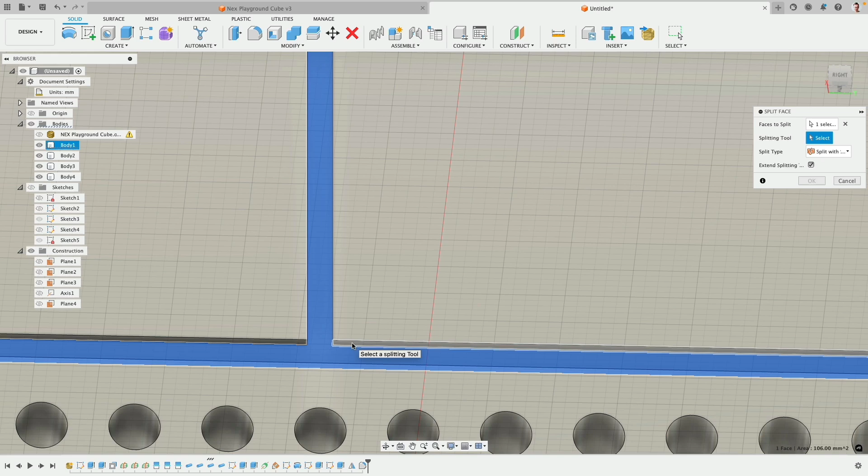This is one big face, but only this area should be cleaned up. So I will go to split face and say that face, please split among that face. Extend splitting. There, now I have that edge.

Beautiful. Right click, repeat, so along this one. Oh, hold on, because right click edit, since we're doing this to all, I'm adding these to that selection. I will shift and click on it, and I just want to use this one and extend splitting. Okay, good, much better.

Then again, we can go to A. So I don't want to overwrite everything, I just want certain faces. So select faces, not the body. Select through is fine. Click and drag. Click and drag. No.

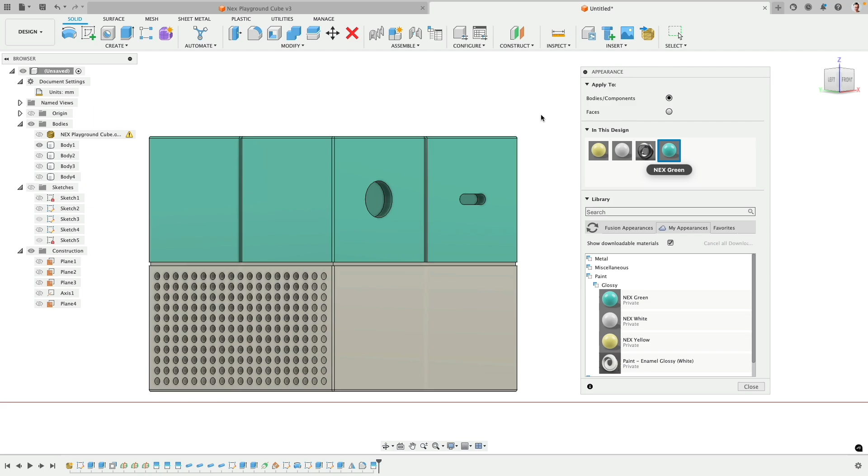Sometimes the selection system I find is a little bit finicky. Who knows, let's see. See, that's not what I wanted. Left to right. Yeah, that's better, left to right. There, it selected everything, so it was actually quite easy.

Then here, this camera element in one version is yellow, and other versions are actually reverse. So to the faces, this one and this one to the faces. Very good. This one will be yellowish too. We can also make this yellow if we want to, or technically speaking, that's probably just the white material actually.

So here, zack and zack and zack, zack. There, there, there, there, beautiful. Okay, the camera we need to do. So the camera is actually quite interesting because it's glossy in a less glossy material.

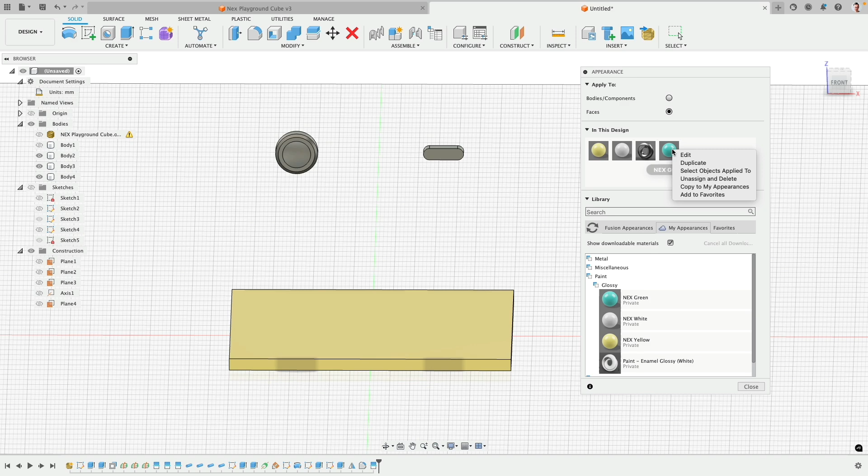So the green here will duplicate, double click, go to a dark, let's say NEX dark gray. Very good, I drag this one over there and there. Actually, I will do the body. Cancel. I don't, that's highlighted other objects.

Yep, okay, very good. No idea what that means. This is an LED, so let's go to Fusion.

Where is the LED? We can just search for it. 81 lumens, 20 lumens, yeah this is a low lumen, not watts. We measure the amount of light that's being emitted with lumen. Very good, so that is all good.

This face has to be kind of like high glossy. And for that, we could, yeah, do we have a glass material color there? There, we put the glass on it. Okay, cool.

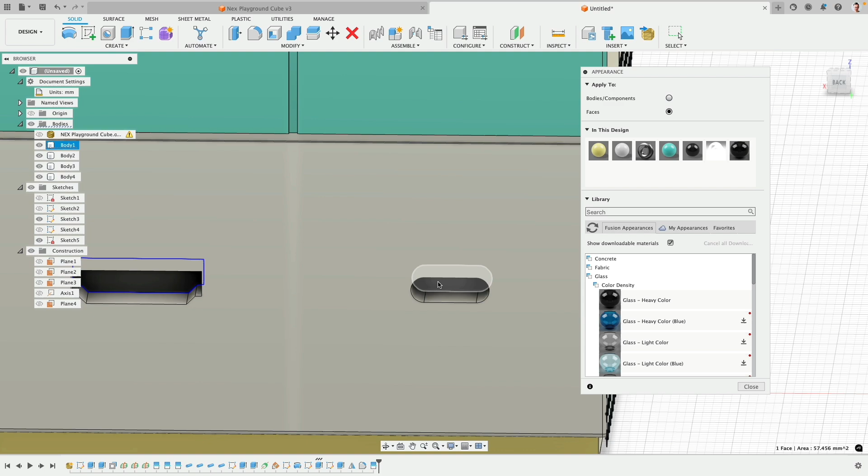Very good. Beautiful. So if we want to trick the system a little bit more, that's the glass. As you see, I just darkened these parts. So when we look into these areas, we don't see it as much. That's going to be interesting to select.

I want to get all these elements in there. I will switch to the wireframe and then I press A, face, select all body faces, just this. Yes, that's correct. But actually now I want to see what I'm doing here. Ah, there, beautiful, cool.

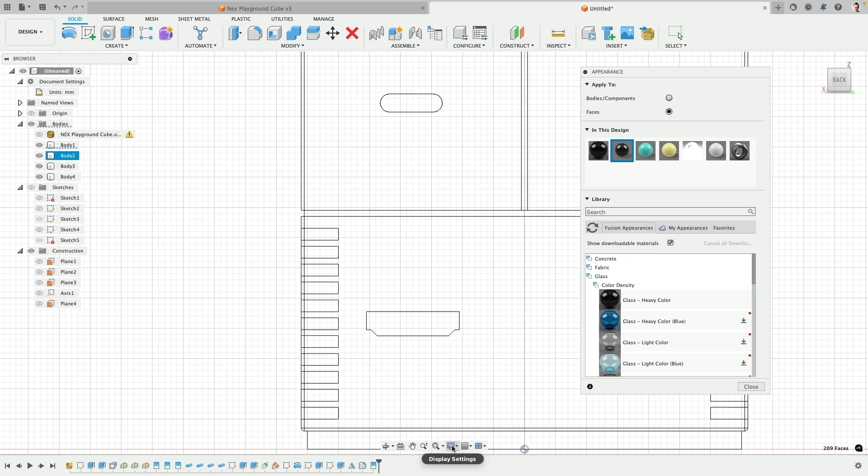And one last one here. Cool, okay, there, wonderful. There is actually now our NEX cube, perfectly done, modeled, and textured.

Ready to create a rendering for it. So let's talk about how do we present, render our product. Before jumping into any render application, I think it is, when you're a student, very useful to study how a product was presented. And here from the NEX website, I pulled multiple images.

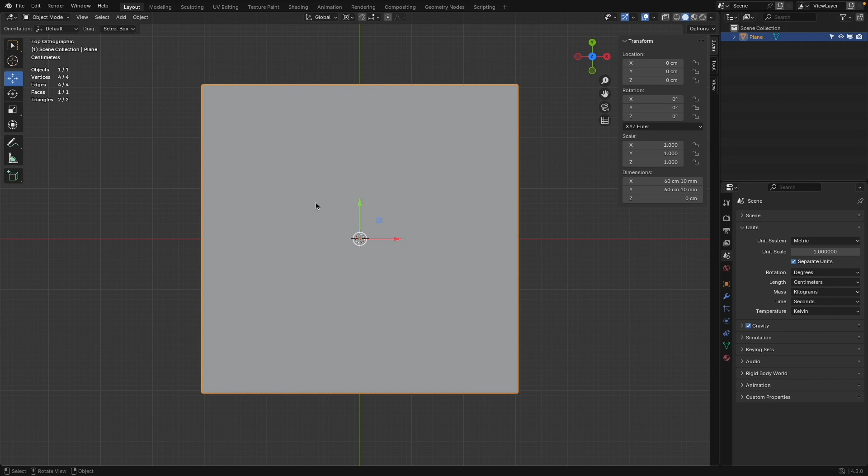Perfect, I have this rectangle in my default scene. I press X and delete it. Then I go to File, Import. Here's the USD importer, navigate to where you have it downloaded to. There it is, click Import. And one more time, there's a remote control.

Cool, and zoom out a little bit. Everything looks kind of okay, but if I click, for example, this cube, that thing is huge. So we have to scale everything down. You see, it's 720 centimeters.

One very easy way to do this is select everything with A. You also see there are these interesting icons, these are parented. So we say parent, parent, parent, clear parent. Then we can select these two empties, press X and delete. Press A again, shift left mouse button click the main cube, go object, parent, simply parent it. Click now only with the mouse on the GameCube, and look here, all this has to be 1 and 1 and 1.

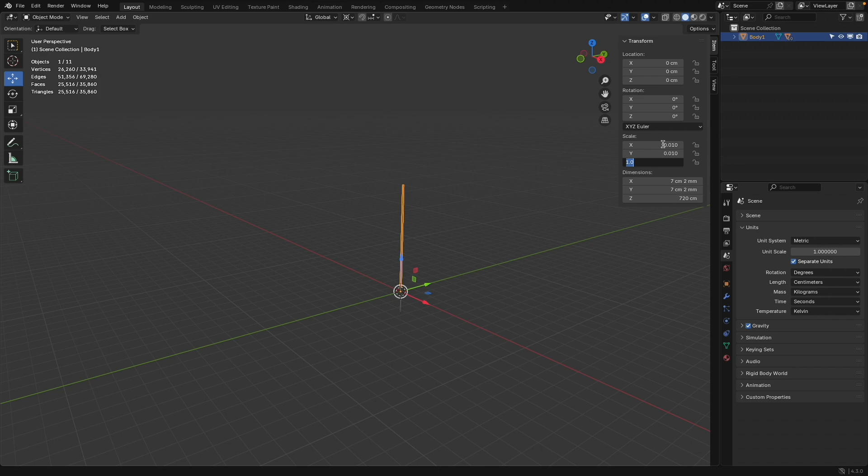Actually, that's still a little bit too big. So 0.1, still too big. 0.01, that's actually the scale factor. 0.01, tab, 0.01, enter. Then you can select everything and hold on one second, Fusion is beeping there.

It stopped beeping. With all the stuff selected, we can press A, then zoom into and reset our view. Then with everything selected, go object, parent clear, and keep transformation. You still see the scale is a little bit odd. Then we go object, apply, scale. Now the scale factor is all set to 1. Beautiful.

To make things easier to move around, we can select the pad, the LED, and the camera, then shift click the GameCube, parent it. So when I then only click the GameCube, everything moves with it. You see. Let's hide all this stuff.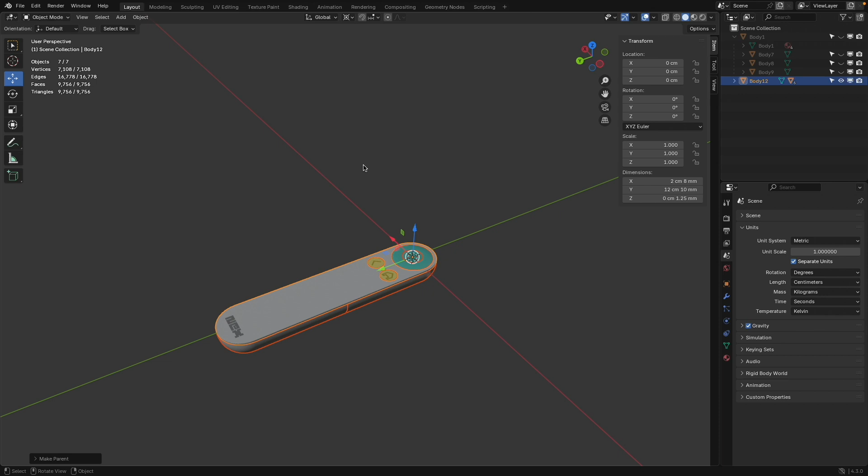Same with the remote control. What do we use first? Here, button, button, button, button, housing, housing, shift click. The last one is the top. Control P, by the way, is the shortcut for that. There we are. Then we can click the top piece, move this to the side, maybe move this up a little bit. There, cool. And show all the rest. Beautiful. Cool. Okay.

I have this one set to 3D cursor. We can stage this a little bit. Now we want to have a nice transparent background, white background. So let's actually add a nice plane. There we are. It can be nice and big.

The environment, however, we would also like to design. When we photograph an object, even in a photo studio, we have an environment kind of like reflecting sunlight. I would like also to simulate the lighting inside the living room. So we need to download a nice indoor HDRI. In Google, for example, you can then Google or search free HDRI.

Polyhaven is really perfect. We will go to the HDRIs, and here's indoor. Brown Photostudio, for example, looks kind of nice. We don't really need a really high resolution, 1K is fine. Then click download and drag it to where you're saving all your files for this assignment. Okay, so back to Blender.

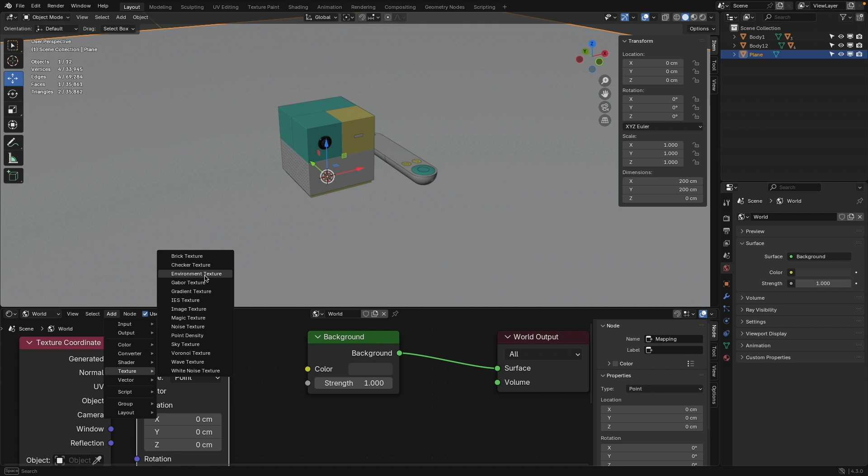Input texture coordinate. We can click and left mouse button drag this one out. Mapping vector is actually correct. Then add texture, environment texture. This goes to there, and here in open, we load that HDRI file. There. Strength 1 is fine, we can keep it this way.

To speed up our rendering, I will go to this border, right click, split vertical, press in the left viewport N and T. Then I can zoom in a little bit, scroll wheel, I can scroll left and right, and then turn on rendering. Cool, there it is. It looks already pretty cool.

By the way, the LED is actually pretty bright. If we set this to 0, you see then that's only the LED creating that light, which means that's maybe a tick too strong. So let's work on the materials.

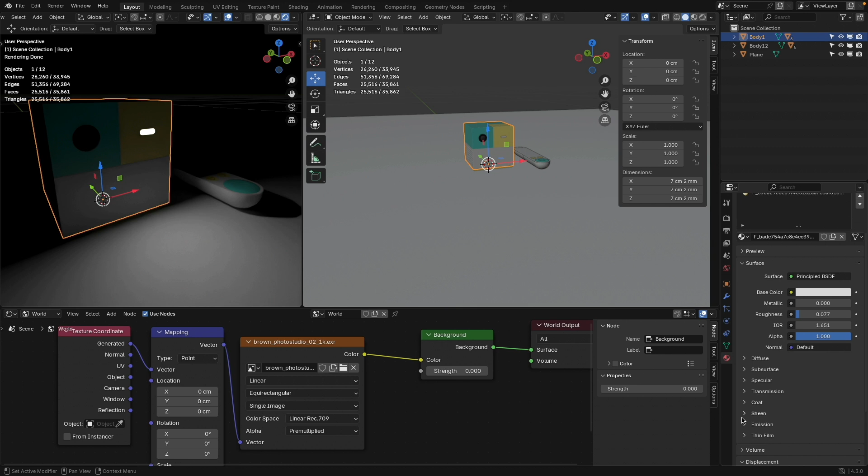I select my cube, go to the material, and then I need to see which one is emitting the light. Oh, this is an individual object, by the way. There it is, so I can also name this LED, for example. Cool, go to emission and maybe 0.2. So it is there, it's just maybe 0.1. That is fine, it's very, very diffuse.

Okay, if we go back and increase our background to 1, there we see it, and now it's glowing, it's pure white, but we don't have any of these annoying reflections anymore. We also have 2 bodies, and they always have the same material, so we can clean up and streamline everything a little bit.

Here's my remote control, and let's say I call this one NEX Green. Okay, you use that. Yeah, and here, this is the remote control, I want that to swap out with the NEX Green. There, so that's cleaned up. This is actually the NEX Gray, kind of like for the plugs, etc. If I go to here, so that is next yellow print, and this one is NEX Yellow.

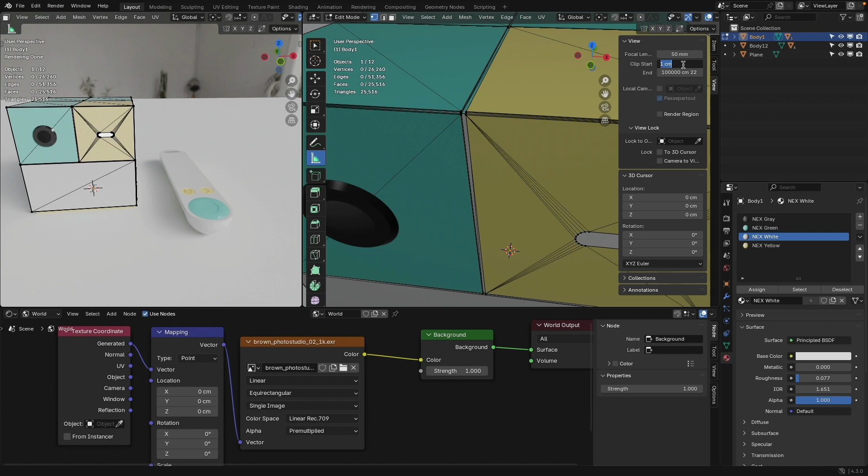I go to edit mode, then I go to view and start clipping 1mm. I can now zoom in quicker. Then I go to face select, select this face - there's the green, and I click assign. Oh, same here.

Oh, I just realized I think I forgot to do this in the tutorial. Oh yeah, all good. Oh, they're triangles, so I have to be careful that we also select the other element. And green, assign - easy peasy, fixed.

This is a different model than the lecture demonstration model you see here. These are, in my case, not black.

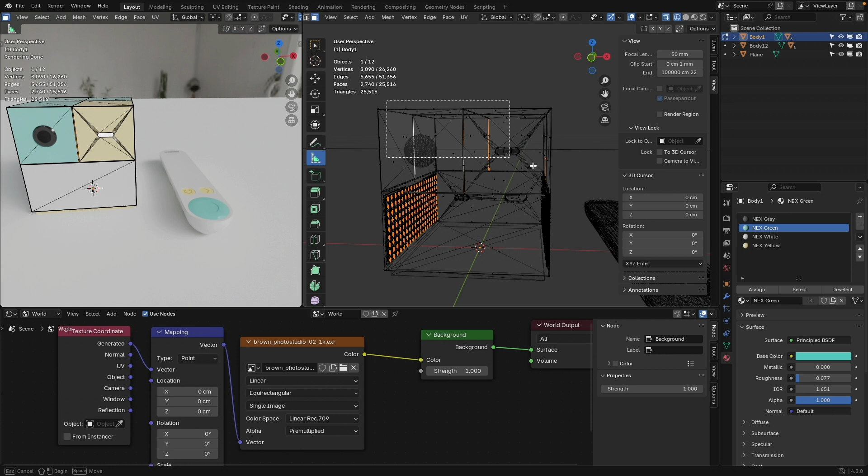So I, for example, will go ahead back into edit mode, go to wireframe mode, and then I press B to select and select these faces, B middle mouse button to deselect that. I don't want those to be selected, B left mouse button. Yeah, yep, very good, gray assign. Scroll wheel, Z and solid - there it is, very good, cool, okay.

Yeah, there you can see how these are a little bit darker.

Sweet, so we need to add a camera. So for example, front, Shift A and add a camera. Then here we click on camera - now we jumped into it. We don't see anything because the camera is at the center. We can move this back, move the camera up, go to top view, move the camera to here, press R and rotate it. There, beautiful.

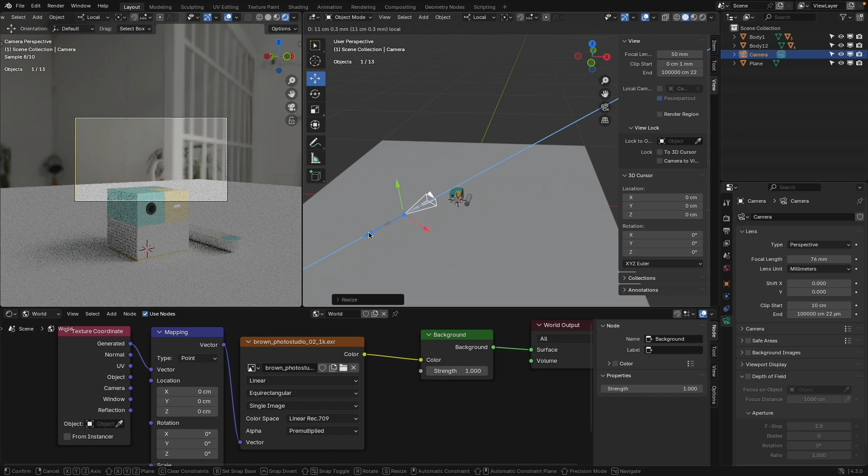I would like to see more on top of the device, so I move the camera up to here. This is all correct. Then I will go to the focal length, say maybe 75, so a little bit more like a telephoto camera. I can press S to scale that icon down, go local mode so I can move this along this rotation, and then I'm just shifting the camera down. Needs also further back, maybe a little bit up. Shift this over there.

Frame this more - beautiful. So for everybody who knows photography a little bit, we also have compositional guides, for example thirds, etc. So here, this one we can bring to there, bring to there. Now this is like where the fun stuff now happens. I could press R to rotate this, maybe show this a tick more, go top view, rotate it this way or that way so it's not so artificial. G to move this back a little bit. Play with that composition - there, beautiful, cool.

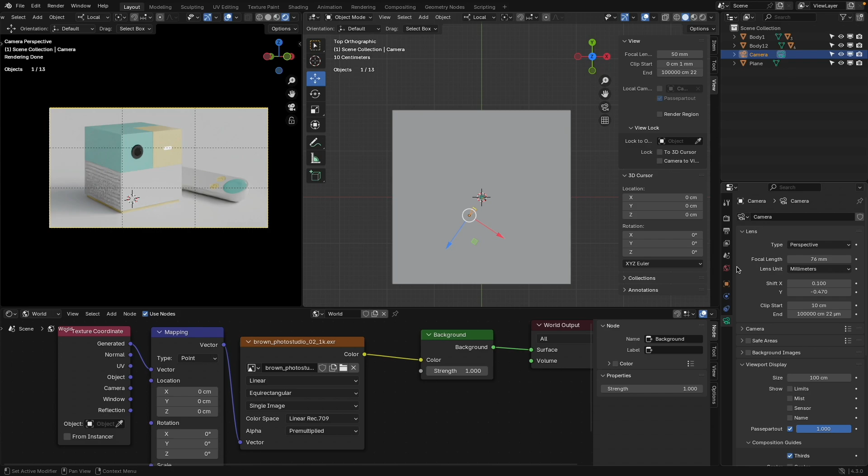This backdrop is too small. In my case here, there it cuts over, so I make this bigger. I can select the camera and also turn this passepartout to here - this is only what I want to see. Oh, that's actually pretty nice.

We get some nice highlights here. Very good. If I turn the passepartout off for a second and zoom out, you see there's that environment - so light comes from there.

That is pretty good. When we first created the texture coordinate system and then the mapping, we did this because when I rotate, or left mouse button click and drag, I'm rotating that image. So with that I can then adjust if the light comes from the left, from behind, more from the front, from the left.

I will actually turn the passepartout on again so I can just focus on it. This looks quite nice, for example how the shadow goes over there, over the remote control. This is also quite nice. Cool, okay.

Because all objects have exactly the same materials, if we need to do a color adjustment we can go ahead and play with this. Oh yeah, we don't really see it. There you see we are adjusting everything at the same time. So this is actually quite nice, beautiful.

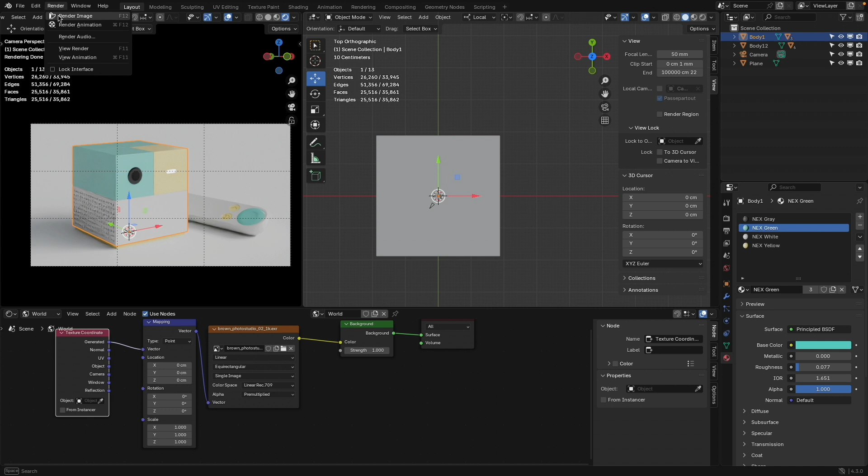What we could do now is go to the render button and hit render, but before we do this, this is the size of the image - 1920 by 1080, based on how big your image has to be. You need to calculate the amount of pixels you need, because when we change this, this will then adjust, as you can see, the format.

Let's also make another camera from the front. So I go to the front view, go to add, and then I go camera. There we are, we bring this back.

Now I need to find the main menu. Let's stop this. Scroll wheel, view, camera, set active camera, active object as camera. So this camera, we will look through there. And when I press Z, I can go back into rendered mode.

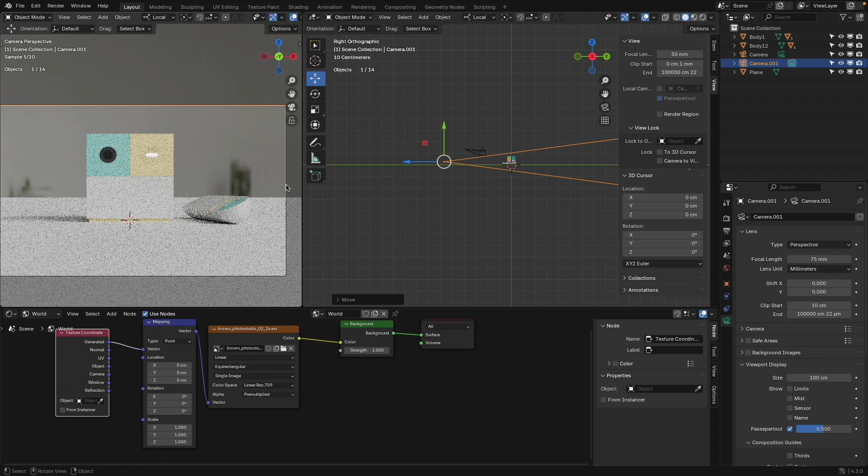I can move this up a little bit, change the camera, go to 75, go in there - kind of cool. Maybe a little bit higher. Curious how this would look.

There we are. 140, or 100 - I like how in this view it goes back to there. If we now want to create a rendering of this with a transparent background but keep the drop shadow, so I can composite this later in a presentation, I want to do the following.

I will select this object, go to Object Properties, go to Visibility, and tell it Shadow Catcher. Shadow Catcher is the common industry term for making an object transparent but catching the shadow. I don't want to see the background, so I'll go to Render, then Film, and make the film transparent. So now everything is being rendered and transparent.

So the two renderings I would like to create - let's continue on this one - I also would like now to colorize this background. This is kind of the cool thing about what you can do in Blender without jumping to Photoshop. We will go now to the compositor. Think about the compositor kind of like Photoshop, where we work with layers. Here's our render layer, there's our composite.

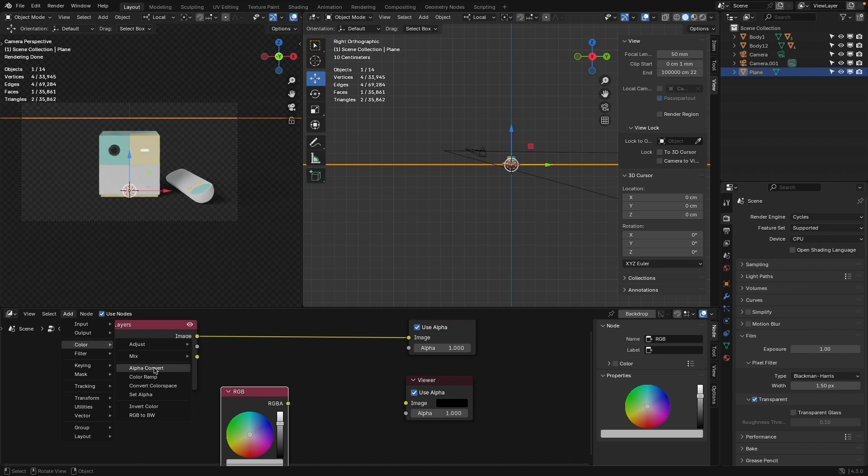I will add an output viewer, add input constant and RGB value. This has a transparency, so I would like to add - not set alpha, mix, alpha over - there, actually this one we don't need. This goes to here, this goes to there, this goes to there. We don't really see anything there. Oh wait, scroll wheel. Here, always.

So with this, we turn on whatever we do here showing up in our rendering. So look at this - now we can change the colors of the background before we actually do a real rendering. Maybe a nice color like this.

The drop shadow is really beautiful. There isn't really much of a shadow on the left side, more on the right side. So I will, in this case, select the camera and shift it over a little bit to capture more of the drop shadow here, so if I have to bring this into Photoshop, I have more material to work with.

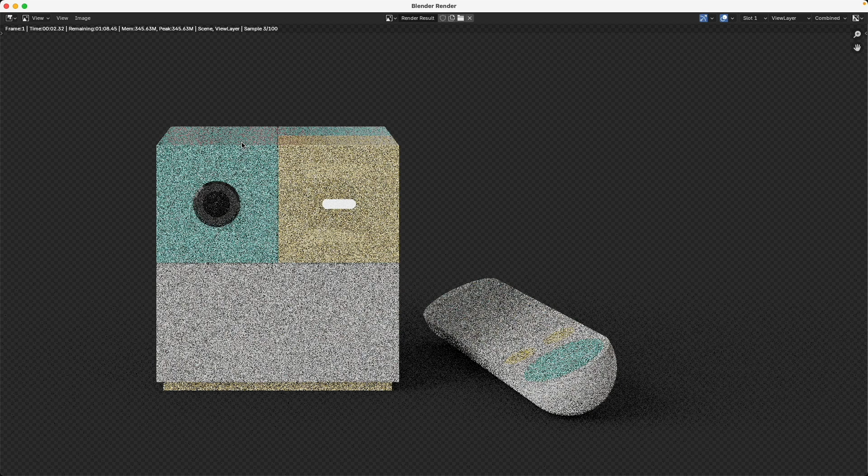So with all that done, let's simply go and hit render. This one is running from basically 1 to 100, and I will just wait for a moment. When this is done, it basically calculates it. I will hit escape to make this quicker. Oh, I did not turn on GPU rendering, and for this demonstration I will set this to 50%, so this is a smaller image.

There. Ta-da! Look at this, beautiful, no? So you see it rendered the image, and then it did that compositing for us. Then you can go and save as RGBA or RGB - with the A, you have the transparency.

Show you - only want to have just a transparent background. So this is maybe next color. Then what we could do is we don't really need to mix anything in. We simply say here, there, this goes to there. The background is transparent. Render it.

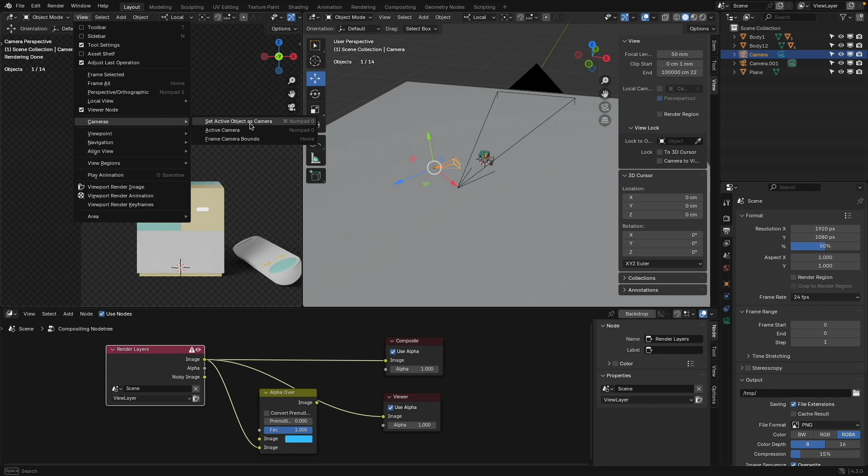Transparent. And for the background, which we designed first, we can go back to this camera, set active. The backdrop, then I do not want to be transparent. There we are, and hit render.

Beautiful, cool. And this I can just - let's have a ground plane. I can just render with RGB because I don't have a transparent background.

Yeah, that's it. So in summary, I think you saw this was a pretty nice process of bringing two different models in and unifying the materials, designing the environment a little bit. Again, I used the photos also as a reference for the lighting and the background and the styling, and then setting everything up with camera, rendering and compositor to very quickly create these beautiful looking product renderings. That's it.